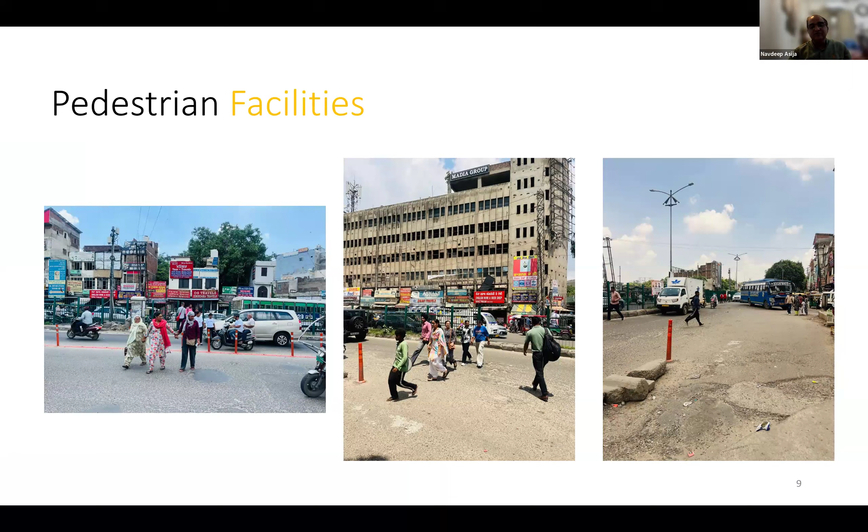This is Ludhiana. So just see the kind of pedestrian facility. This is just right outside the bus stand, and just imagine how the people are trying to cross the road. It's very challenging even to cross the road right in front of a bus stop, because a bus stop is where a lot of pedestrians come to board the bus and go wherever they want to go. And basic infrastructure is missing even to just cross the road right in the middle of the city.

This is National Highway. Again, with the picture from the National Highway, just see there is a pedestrian crossing somehow being marked, but right in front of that there is a crash barrier. So you reach the middle of the road and then you have to jump in order to cross the road. So this simply elaborates that pedestrian infrastructures are not being taken seriously.

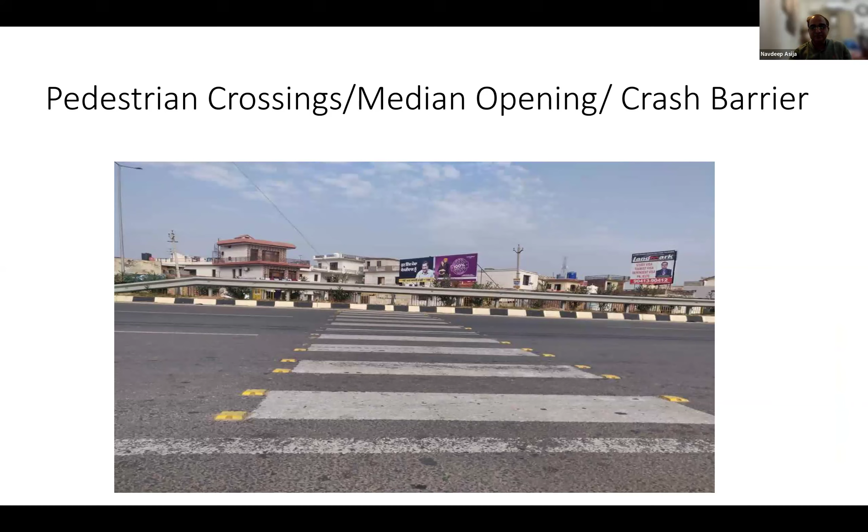Now, if you see the junction and the street, this is a picture from Pathankot. You see the kind of corner which is there. A vehicle can still take a turn. But if somebody is walking at night and there is no light, for sure that person will fall into that ditch.

This is another picture. We call it inclusive infrastructure, even for specially abled people and pedestrianization. You see that zebra crossing, on the other side there is a crash barrier, and on the back side, a sharp pole is there. Anyone can fall on it and get injured.

Similarly, on the right hand side of my picture, you see that tactile tiles are there. Maybe a blind person starts walking, and there is a pole in front, and then it is further leading to the wall. So first you hit the pole, and then you hit the wall. Such a misguided system, and the blind person following this is also a pedestrian. So this simply shows that the infrastructure seriously lacks accessibility for pedestrians.

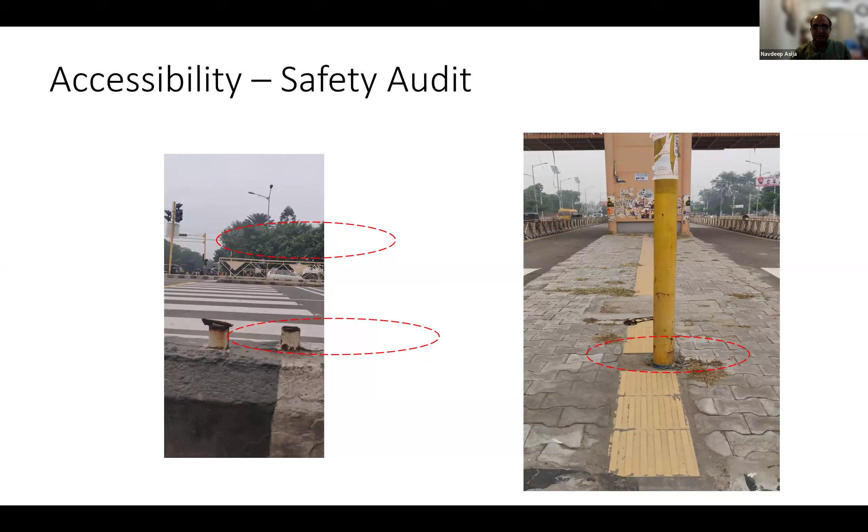Now, design wise, it's a good design in terms of, just see the picture. The open drain has been created right in front of their houses.

So either they'll die with the mosquitoes and the malaria, or otherwise somebody will... I mean, this picture, I'm the one who took the picture, but I actually helped him cross the road. I just took the picture and then I immediately rushed to this person and helped him cross the road. But later on, after the audit, the entire drain was covered. It was initially kept as an open drain.

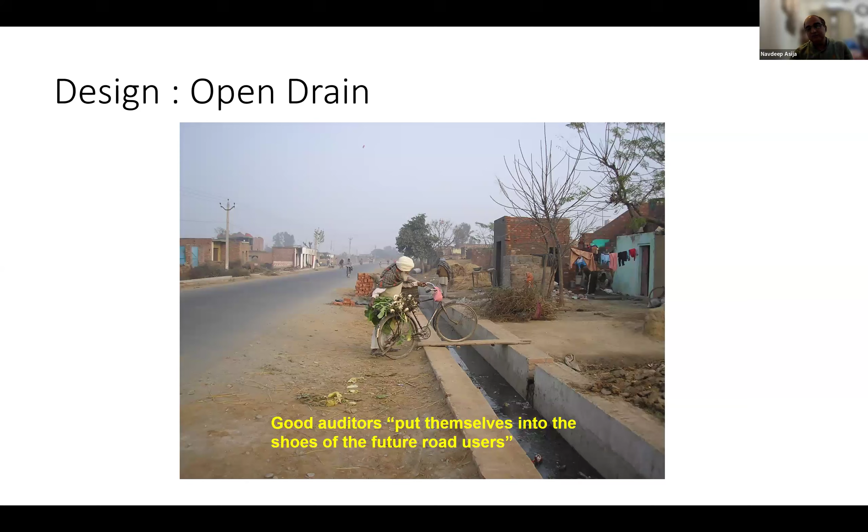So, as an auditor, sometimes we have to put ourselves into that situation so that you can see the problem of the road. We are not just a designer, but we need to put ourselves into that situation. Similarly, there are many such problems, and I'm just highlighting one after another. This is Lalru, another situation, and this is a common scenario: there is a flyover, the bus stops people at the toe of the flyover, and then they cross the road.

This is already known. This is Chandigarh, the most advanced city. The cycle track is there, the pedestrian path is there. So they have widened the road, and signages and everything are there. So there is a possibility that any vehicle may hit it. Or even, there is a zebra crossing, but in front of the zebra crossing, you see that they have put a bollard, a steel bollard or something.

Somebody on a wheelchair, and this is in front of the hospital. So somebody on a wheelchair, you can imagine how he or she will cross this road. So another challenge. Something has been done half-heartedly. Change has started happening, but the saddest part is it's very slow. This I showed you.

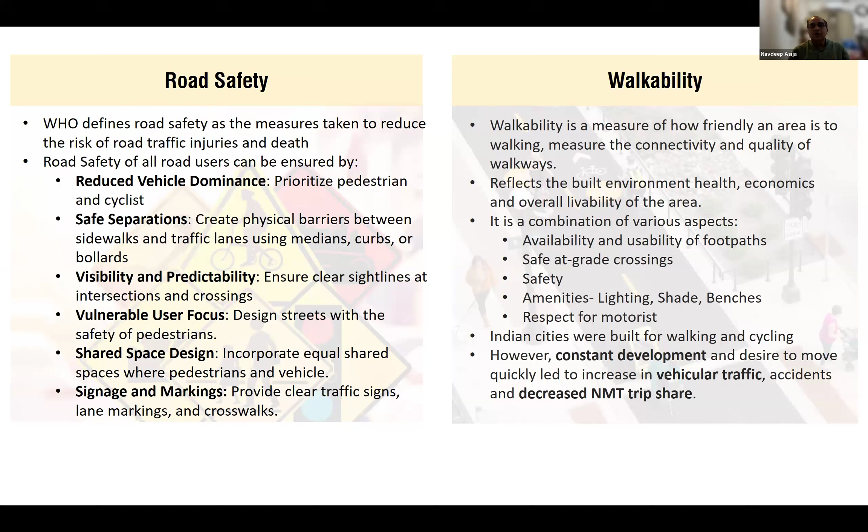I mean, one can walk, a child can walk, an elder can walk, and a kid on a tricycle can also move on that safe pedestrian walkway. And that is where, apart from ensuring their safety, we need to improve their efficiency as well.

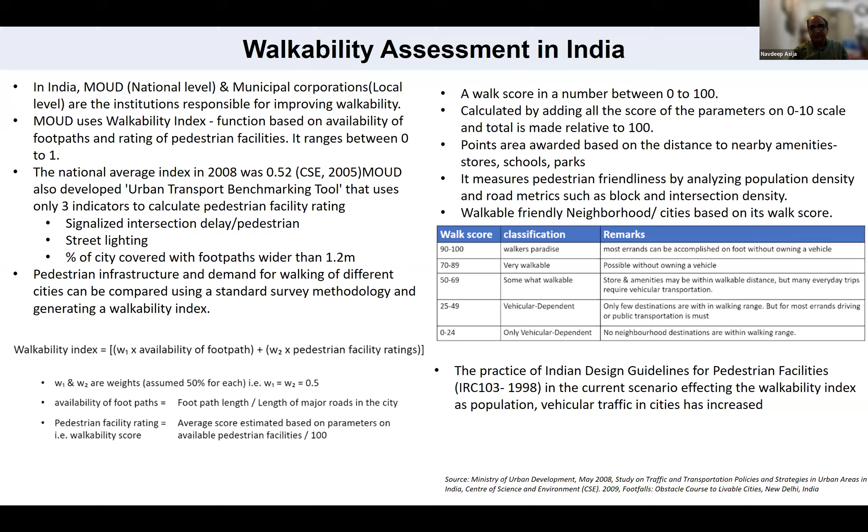So there was one study at a municipal corporation level conducted by the Ministry of Urban Development, which was a walkability assessment in India. So they came up with the walking score, 90 to 100. This is the kind of methodology they picked up: what percentage of the city is covered with footpaths wider than a threshold. So they picked up, in any city, the number of roads versus the roads which have footpaths more than 1.2 meters, because that's the minimum required to call something a footpath. So looking into these standards, they have done the rating score for the assessment methodology.

So this was a very important study. In the year 2008, they used this kind of walkability assessment parameter in terms of walking path modal conflict. They have done a very extensive study, with length of the surveys, walking time, all these, in order to do the walkability assessment and come up with a study. And this is the walkability score of India. So if you need any slide, I can slow it down on that.

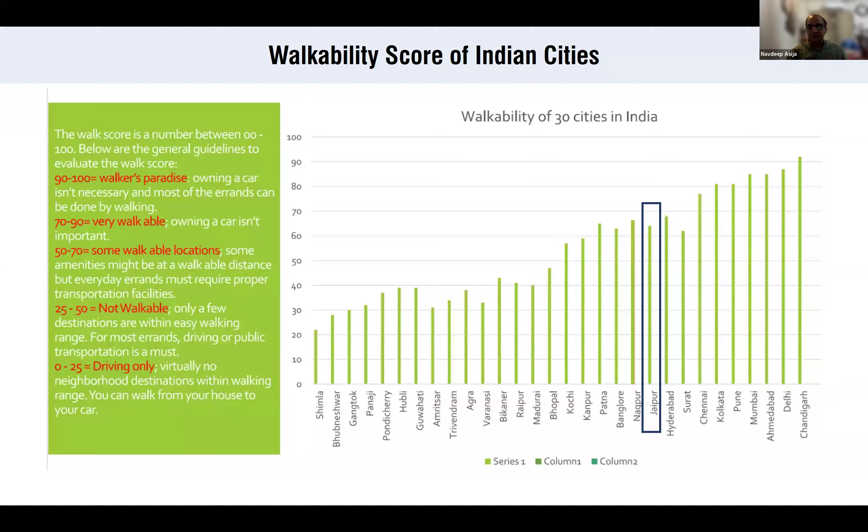All the tourist cities are supposed to be walking friendly, but you can very well imagine that things are not up to the mark. In Gangtok, a lot of effort has been made after this study to improve walkability, but this is the true sense. We have the numbers of deaths in these cities, but otherwise when we correlate it with the infrastructure, these are the general numbers available to us. Now this slide is I think the old one. I picked it up prior to corona.

So what has happened? The kind of infrastructure we have created actually attracted more motor transport. It expanded our cities. Our cities started expanding. Walkability has gone down. Cyclists have gone down. So now who actually gets the benefit? Imagine this. Out of the Fortune 500 companies, of the top 10, seven are oil companies and two are car manufacturers. So out of 10, nine are either selling oil or selling cars.

More pedestrians and cyclists are getting killed. No one is even thinking about them, but as a result, someone else is making profit out of it. So this is the kind of thing which has been created over time: we are creating infrastructure for motorized transport only, and we are actually eliminating our pedestrians and cyclists by design.

So there are international studies also available on walkability. I mean, there are a few glimpses. I'm sure Tara ma'am will also show her part, because the detailed study is not available in the public domain as yet. So this is a common slide, and why it is important is car-centric development.

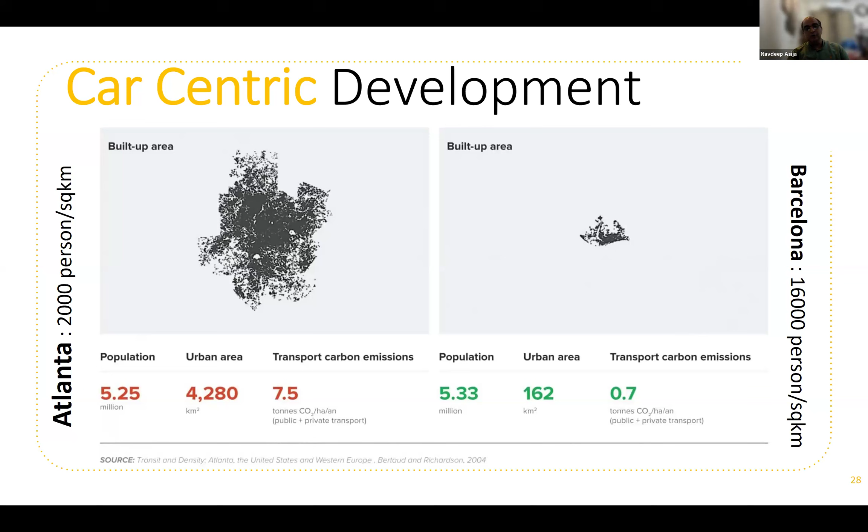But we picked up the left hand side urban design model rather than the right hand side urban design model. And that is where we all need to work, in order to sensitize our authorities about what is happening. Another social impact study, done by the University of the West of England, found that the people who are living along wider roads are actually facing a deteriorated local social life.

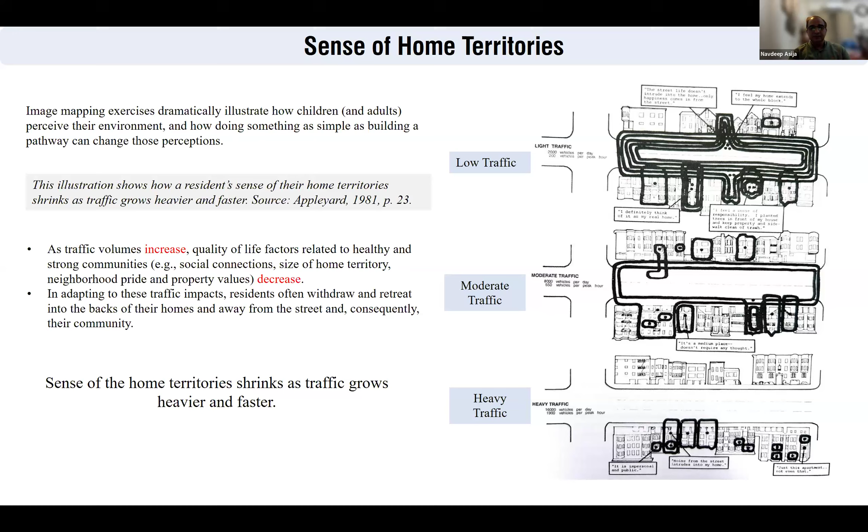So this was another study, I mean, an extension of that: the perception of a neighborhood. A 10-year-old child, when he was asked to draw a map, just drew something. The school is here, hospital is here. I mean, it's very disconnected. He just knows that something is there, but how to go there? He just made this sketch as a very disconnected path.

If you see this picture on the left hand side, this neighborhood concept was created by a 10-year-old child when he was asked to draw a sketch. And the same 10-year-old who was into bicycling and walking everywhere, when he was told to draw the map of the city where he is living, all the roads and every connection is very clear. He knows this road goes from left to right and right to left.

What is the size of the city, where the important places are, where my university is, where my school is. Everything is very clearly drawn. Why this disconnected path versus well connected path? The difference was the traffic. Because when the child was moving in the car, he was just able to see the key points, the key establishments, whereas on the right hand side, he was very clear. So that's why we lost our sense of neighborhood.

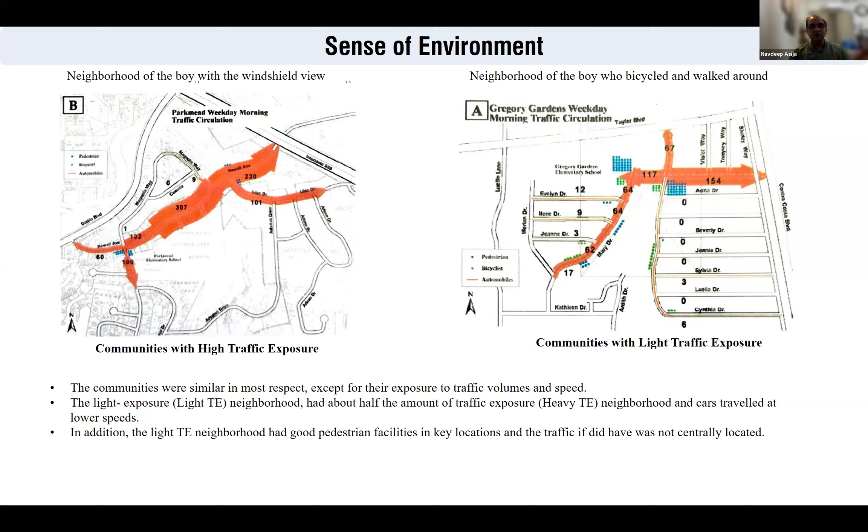the windshield view vis-a-vis somebody who's walking and cycling. The conclusions of this study were expression of danger and identification of a new pathway and stop sign. They were not able to identify many of the signages. Even the expression of danger: when they were asked to draw where they feel most in danger, they marked, I feel danger when I go to school. And after improvement, they have started improving things.

So such interventions or international studies are available, which need to be pushed into our own system. We need a lot of researchers and champions who can do the advocacy for cycling and walking. We are not against motorized traffic. They are supposed to be there. They need to be there. But at the same time, the most neglected part has to be there, because that is straight away impacting our individual life as well.

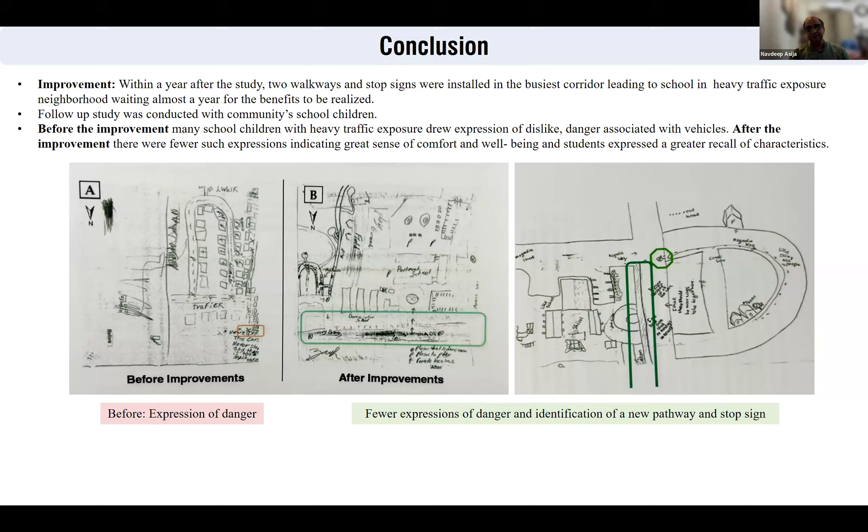So it's very simple. If you design a system or infrastructure for vehicles, the vehicles will come. If you design a system for pedestrians and cyclists, they will come. So saying that there are fewer people walking and that's why we don't need footpaths is not true. It is a bad perception being built into our system, into our decision making. As a matter of fact, wherever there is a safe place for walking, people love to walk.

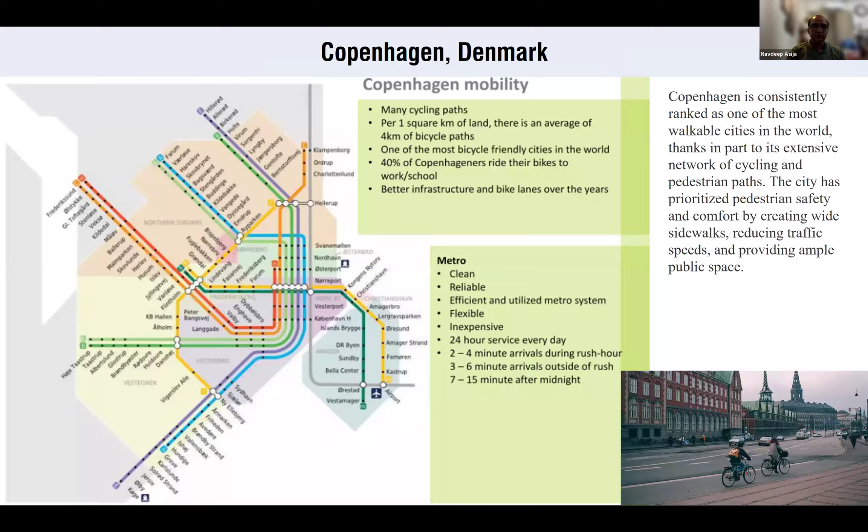So it's not that India is bad. I mean, it's not that India is not doing it. We are per se walkable cities. The majority of the cities still have that walking facility. It's just that first we are destroying that, and then later we are recreating it, or later we may recreate it.

So when it comes to Punjab, we have not stopped here just by building infrastructure, because that is something political: if one government goes and the next government comes, they may or may not take it forward. Taking one step further, we decided to extend this to the citizens as their right.

And when I say it is a right, we have fundamental rights, and Article 21 is the right to life. That guarantees us, and it is universal. It is not only for Indian citizens, but anyone who is even visiting India also has a right to life.

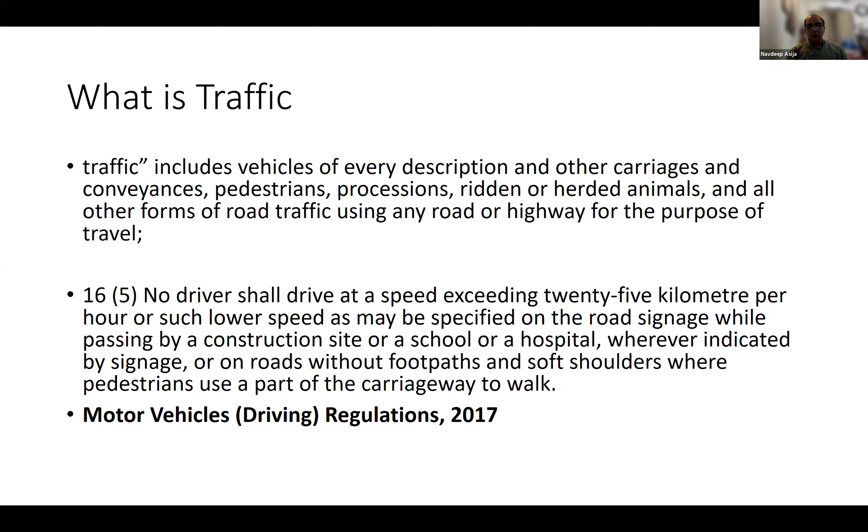So traffic, I have already given you the definition. So traffic and the right to walk are now together. So Article 21, I would just like to give you a brief, because we may not be from a legal background, and it's very important to understand that every infrastructure needs legal backing also, that when we make roads or anything, it is duly protected, supported and strengthened by the law, and that's why things are happening.

So now the right to life is Article 21 of our constitution. Justice P.N. Bhagwati in the 80s, when he was the Chief Justice of the Supreme Court, in one landmark judgment defined life as not only physical existence, but the use of every limb or faculty through which life is enjoyed. The right to life includes the right to a healthy environment.

So what he did was he extended the right to life to a right to healthy life. So only one word was added.

So now coming to our own part, which is the design guideline. I've given you enough of the problem. There are certain good things happening in the country, and now it comes to the guidelines. What do we have in our country to design safe pedestrian infrastructure?

So IRC 103:2012 guideline for the pedestrian facility is available, and at the same time, the general NMT guideline document by the ministry; both are available on the net. You can Google, and you can use this as your reference document for this particular lecture as well, because a lot of detail will be there in these two documents.

IRC, I think, is subscription based, but some PDFs are available on the net as well. And the NMT guideline document as a policy is available on the Ministry of Urban Development. These are two very important initial documents of our country. So now the guidelines are about non-motorized transport. I'm switching from just pedestrian and just cyclist to the overall non-motorized transport.

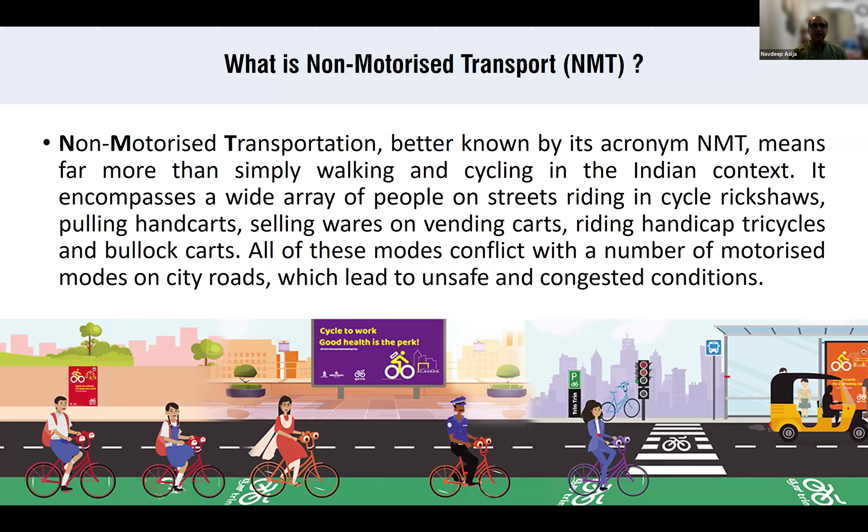It is very well defined in our IRC what actually non-motorized transport is. Largely, pulling carts, selling wares, vending carts, riding handicap tricycles, bullock carts, and it is defined in the traffic as well, and particularly non-motorized traffic has also been defined in IRC. So what is the character of the NMT? Because the next part is we will be talking about non-motorized transport.

Largely it is pedestrians and cyclists, and others also, which is street vendors, people on a tricycle, and everybody has to be taken. It's not just about a cyclist. We have to take a larger picture. So the NMT definition is there. This is given in the IRC. And the pedestrian is any person on foot; guidelines are there.

And a cyclist is any person using a physical power driven cycle. People who use a bicycle, three-wheeled cycle, rickshaw, four-wheeler carts are all included as cyclists. It's not just the bicycle only, but three-wheeled rickshaws or four-wheeled carts are included as cyclists, but driven by physical power, not by motor power. So that's the change. Four-wheel means he's talking about the carts. It's written cars, I think that's carts.

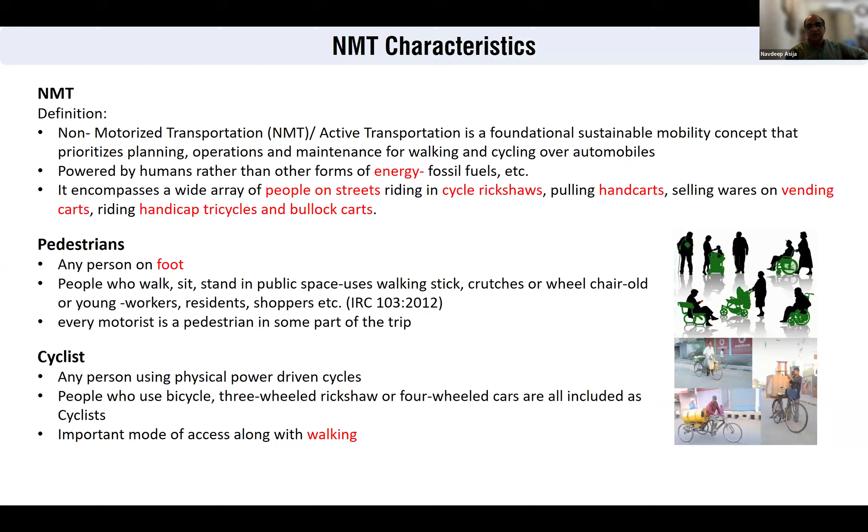Complete streets means streets with everything from street furniture to a place where I can sit, a place where I can walk. I need a good washroom facility and many other public utilities. Everything should be available while walking. The way we have created similar things for motorized transport, wayside amenities and all, similar kinds of things we need on a footpath.

And the most important is an interconnected NMT network. It's not that you will build 5 kilometers of road and expect that people will start walking. The way all our roads are interconnected, from A to B, we can move anywhere. On similar lines, we need it interconnected. So from point A to B, if I have to walk or feel like cycling, it's not that after 5 kilometers there will be 2 kilometers missing and then another 3 kilometers. Whatever we do, whatever we plan, it has to be in continuation.

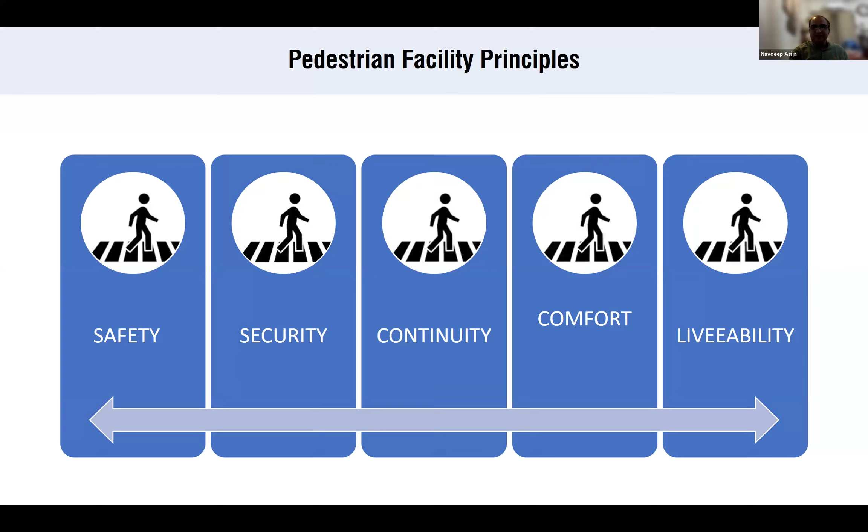As in one of the judgments by the high court I told you about, they are not only talking about walking as a pleasurable experience, but even about the minute details of material selection, that when I'm walking on the footpath it should be nice and good, no broken footpath, no broken tiles, good drainage facility, everything. So livability: when livability comes, lots of vendor hawking space, nice shade, kids and children walking. That makes every space livable. So that's the pedestrian facility principle.

Why I'm quoting time and again Lovely Professional University is because it's a beautifully designed campus. And the best part is, many cities have a 50 to 60,000 population; at least 4, 5, 6,000 cities of this population size are there in India. And the kind of chaos over there, every day there is a jam, there is honking, noise pollution, road accidents. The same 50,000 people are staying in that 500-acre campus: zero fatality, no noise pollution, everybody's walking.

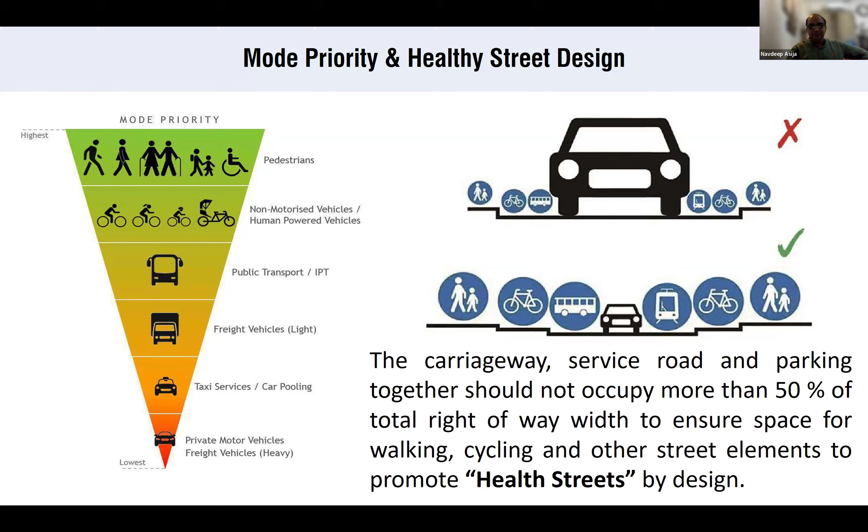Coming to the pedestrian infrastructure design, every design now has a particular design. As I told you, design should cover everything. I agree with Professor Nagendra that LPU actually has a lovely campus. Pedestrian infrastructure wise, what is needed for pedestrian level of safety and level of service: we need a footpath, a curbstone, tactile pavers, guiding tiles, warning tiles, bus stops. Many of you, as an architect, planner, or civil engineer, must be doing this as an individual exercise, and many of you must be exceptionally good in all of it.

But when we come to pedestrian infrastructure, we have to do it in totality. Street furniture, bollards, pedestrian guardrails, signages, street lights, landscaping and street vending, pedestrian crossings, very, very important, at-grade pedestrian crossings and grade-separated pedestrian crossings, which rarely work. And when it comes to the footpath, width is very important, height is very important, the kind of texture and surface, then continuity and integration. Like bus stops are supposed to be integrated with the footpath so that if I walk, I can straight away stop at a bus stop rather than having to go onto the road and then stop at the bus stop. We need everything in continuity.

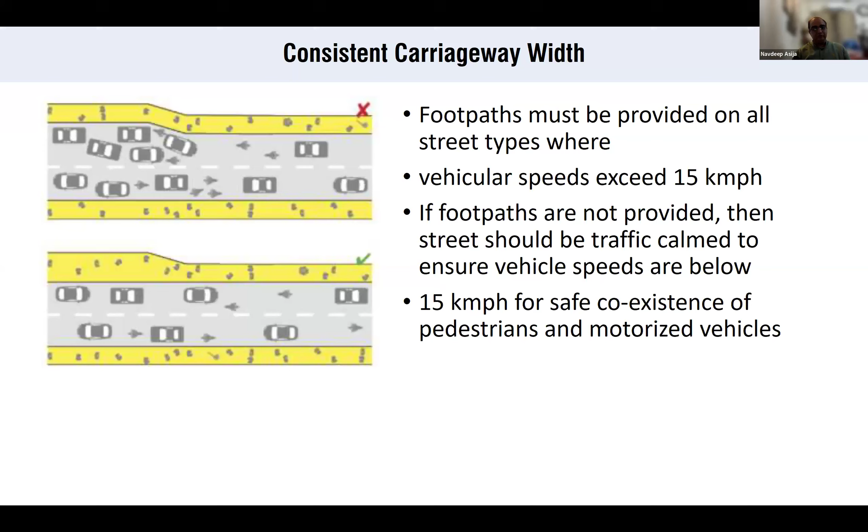Pedestrian flow wise, we generally take 1.5 times. If you are planning anything for one direction, it is fine. But if something has to be for both directions, we need to increase the width by 1.5 times. So these are the standards given in the IRC. When you are auditing a footpath, we can actually check the volume and check the pedestrian level of service, whether it is level of service B or C. We can do this for a comparative study also.

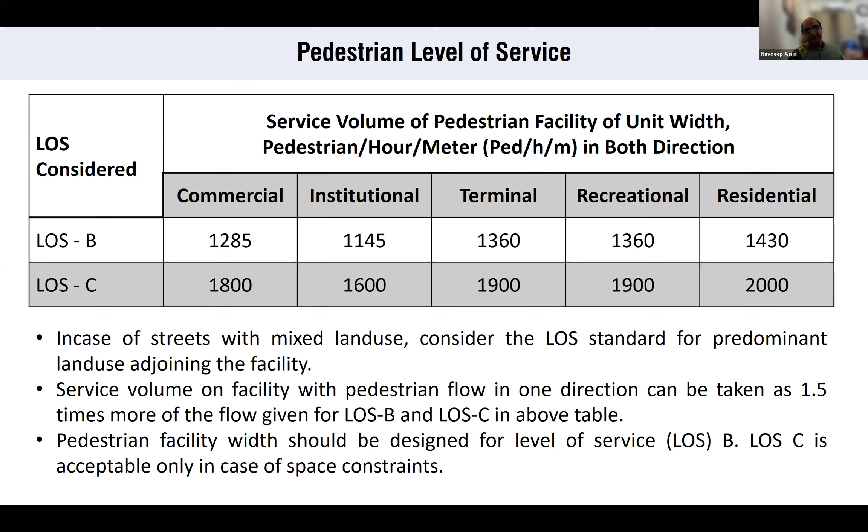Like for example, we are picking up one road for a design and we check today that there is no footpath. If it is 1 meter, fewer pedestrians are there. We can actually calculate the level of service, say E or F or something. But when we improve it, we make a nice footpath and everything, we'll find that the level of service has gone up to B. So that is even a directive we can give to our designer and engineer as a client, that the intent is actually to improve the level of service from C to B, or anything, by assessing the existing system.

So even if I make the same 2 meter wide footpath next to the wall, I will be effectively using that footpath as a 1.5 meter width instead of 2 meter, because half a meter may go wasted because I'll not be able to walk just next to the wall. So this is the kind of mathematics we can do for any city where we live, any exercise we can take up.

As I mentioned, the very first principle is to assess. So for advocacy also, we can actually tell the authorities that, boss, you have made a footpath 2 meter wide, but since it is next to the railing, next to the wall, the effective width is actually 1 meter, and fewer people are able to use it. Why don't we make a buffer, multi-utility zone, and everything so that more and more people can use it?

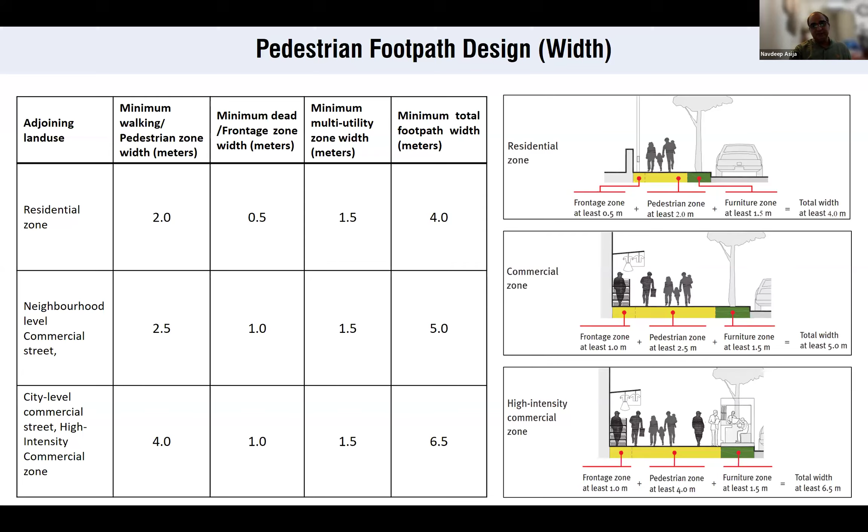So the kerb stone design is very important, because we are not supposed to jump onto the footpath. We simply step up. For example, when we design our home, we are very clear in designing the height of the staircase, what the height should be, because we have to walk. But when we design the footpath, we simply miss that. So the IRC says it should not exceed 150 mm by any chance. That is where children, elders, and adults can actually step onto the footpath, and vehicles will not. Making a height like half a meter makes no sense. That entire footpath will be of no use.

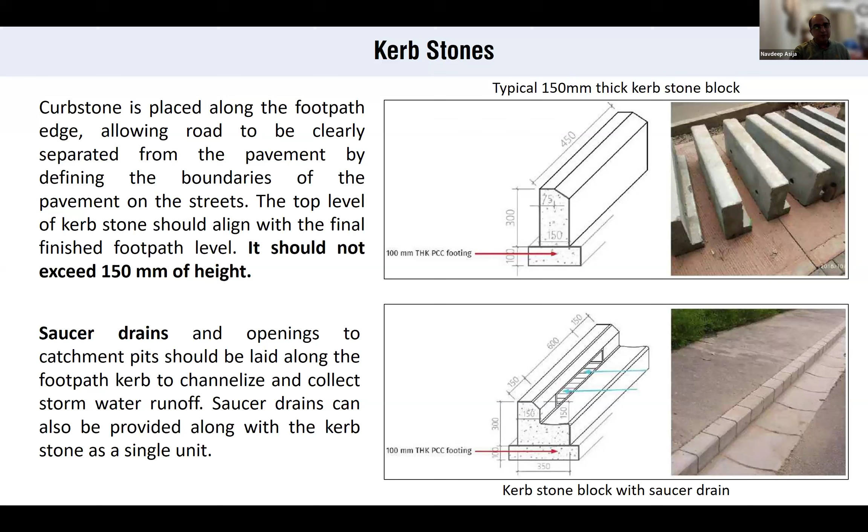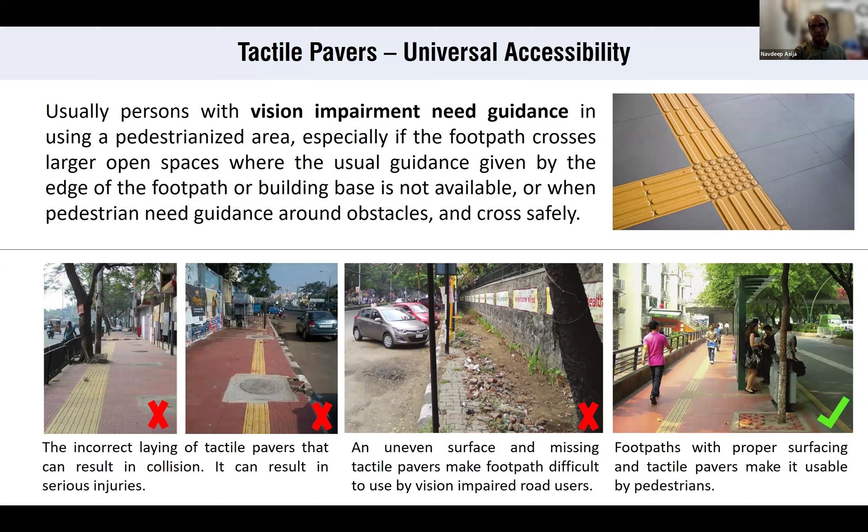So tactile pavers, universal accessibility, we all know how we are supposed to do it. The correct way and incorrect way are very much there. You can see they have made a footpath even next to the wall, and you can very well see that nobody is able to walk. At the same time, where the proper footpath is made, in the picture on the extreme right, people are actually using the multi-utility zone also. The wall height is less. Tactile, universal accessibility pavers are also there, and you can see in totality that this is how it is supposed to be.

These are the two types of tactile pavers: warning tactile and guiding tactile, just to give a direction, and the one we place where we have to change the direction.

Street light, another very important one. From the various components of the design, street light is equally important for the footpath if you want more and more people. And obviously, when we conclude our day's work, evening time is when we start walking, and that is the time when all the footpaths are in dark. We are supposed to have a better, well-lit design for our footpath, our pedestrian zone, our NMT zones.

So the standard thumb rule which has been given for the street light design for footpath and cycle track in IRC is about 20 to 30 lux level for footpath. And as per IRC road safety principles, this lux level is supposed to be double when we are making it for the crossing of the road. This is for the footpath when we are moving along the road, but when we are crossing the road, the lux level is supposed to be double.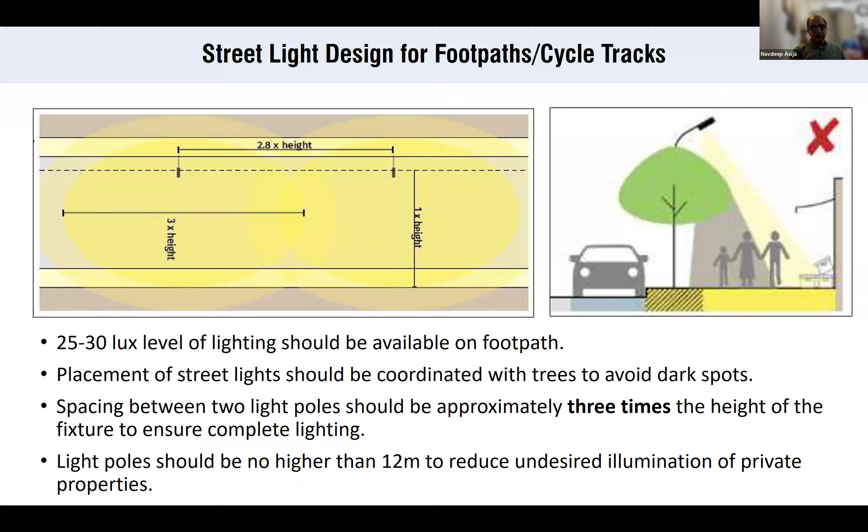So this is like 2.8 into the height of the pole. So the spacing and everything can be designed. The spacing between two light poles should be approximately 3 times the height of the fixture. And the light poles for pedestrians are low height. The picture on the right hand side is showing you that you don't need a very high rise, you just need a pole with a small height.

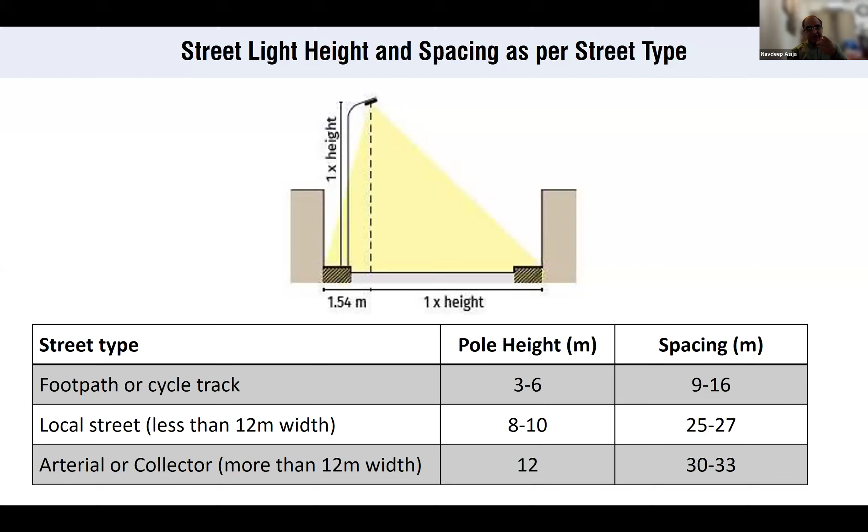So this formula has been given in the IRC: street light height and spacing as per street type. For footpath and cycle track, pole height is 3 to 6 meter. For local streets with less than 12 meter width, the pole height is supposed to be 8 to 10 meter. Arterial roads more than 12 meter width are supposed to have a pole height of 12 meter. The spacing standards are also given, height versus spacing. So this formulation is there in the IRC.

Bollards and signages on footpath, these are the standard signages. I'm sure many of you must be practicing and are very well aware of it. But the general IRC says the bollard should be 0.5 to 0.7 meter high with a 1 meter clear distance so that somebody on a wheelchair can also cross. It should not be that closely spaced, which I showed you in my very first slide of Chandigarh, where in front of a zebra crossing there were bollards, and even somebody who's walking can't cross that. So for that this is needed.

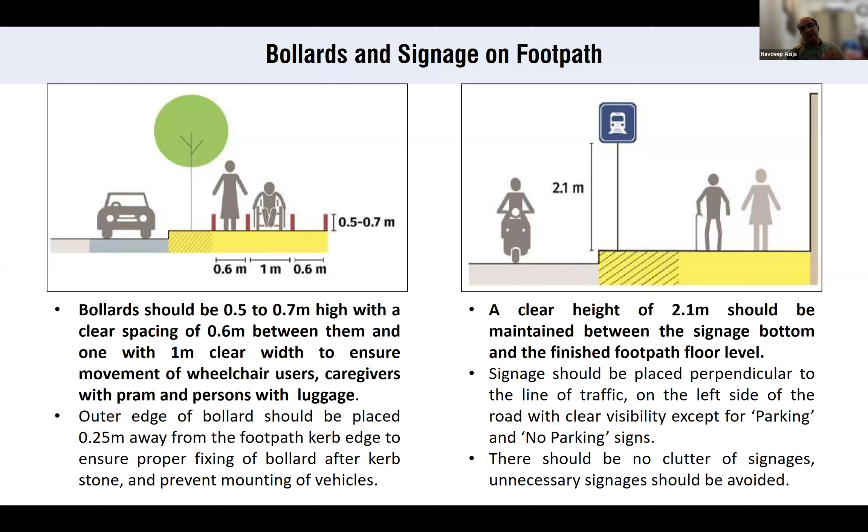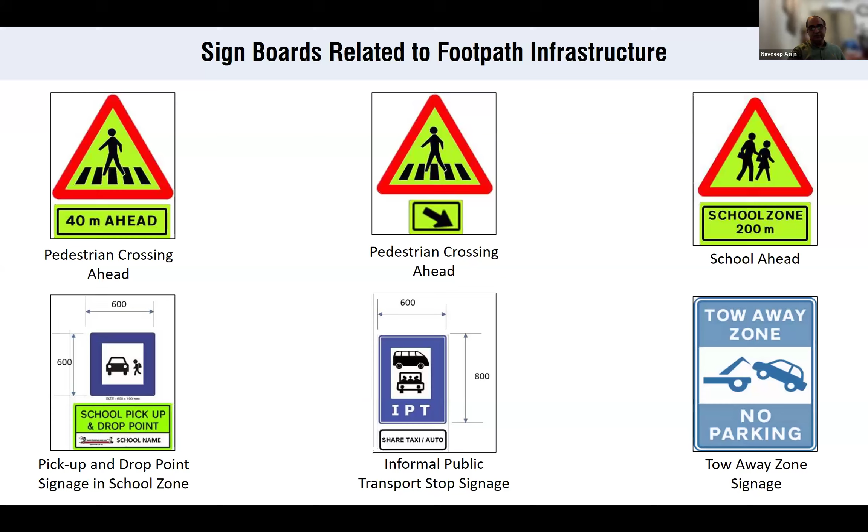And when we are putting signages, they should be in the multi-utility zone, and the height is 2.1 meter. Why 2.1 meter? Because if somebody is walking, the signage should not hit his or her head. One should be able to walk freely under the signages. These are the signboards which are newly introduced in the IRC pedestrian crossing. They are in fluorescent color now, and these are the things we need to put into our footpath infrastructure.

So this defines what is crowded: the more pedestrians there are per square meter of an area, the lower your level of service for pedestrians. So pedestrian level of service, as I showed you, C and D, right? So this is the further elaboration of that.

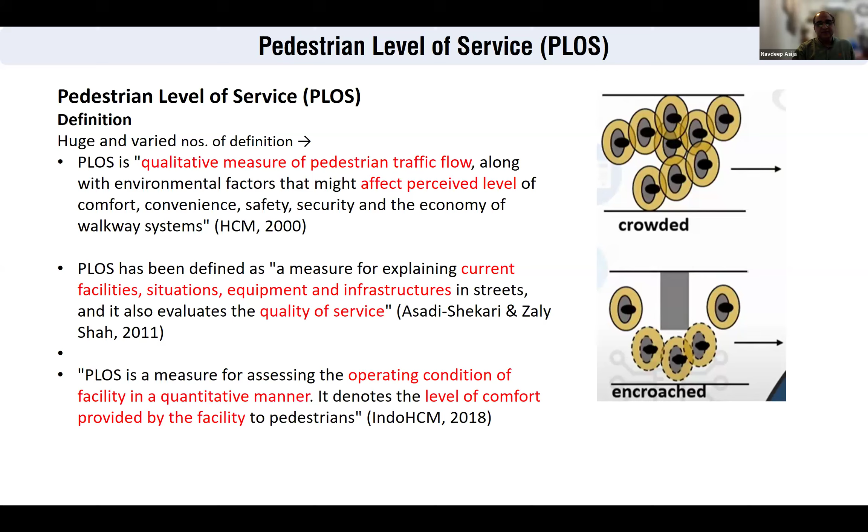Indo HCM. These are the standards; the HCM is the Highway Capacity Manual, and the Indo HCM is developed for India with the CRRI. It's a good document. We all need to read about it. One can purchase it. It's not freely available as of now. So this is the level of comfort. So this is the level of service.

As per Indo HCM, pedestrian level of service for footpath is this. They have given a shy distance also. The shy distance, as I told you, is the distance when if there is a wall or any obstruction on the left and right side of my walking, I'll start walking a little away from it, and that distance is known as a shy distance.

So IRC has very clearly defined under Indo HCM the fixed width: if there is a fixed object, physical width, any functionality, unusable space and the buffer given to the object by the pedestrian. So that we call shyness. So if there are benches, our shy distance is generally 0.3 to 0.5 meter; we just don't touch the bench, but we move slightly away from the bench.

If there is a wall, that shy distance is 0.4 to 0.6, meaning half a meter almost. If a guardrail is there, then we try to walk away. So if you make a nice footpath and put a guardrail there, and on the left hand side there's a wall, and you say my footpath width is 2 meter, as a matter of fact, if I do this calculation, actually my footpath width is 1 meter, because 0.5 for wall and guardrail has actually gone. If a traffic sign is there, we'll slightly move away from it. So these are the shy distances we are required to know when we do the calculation.

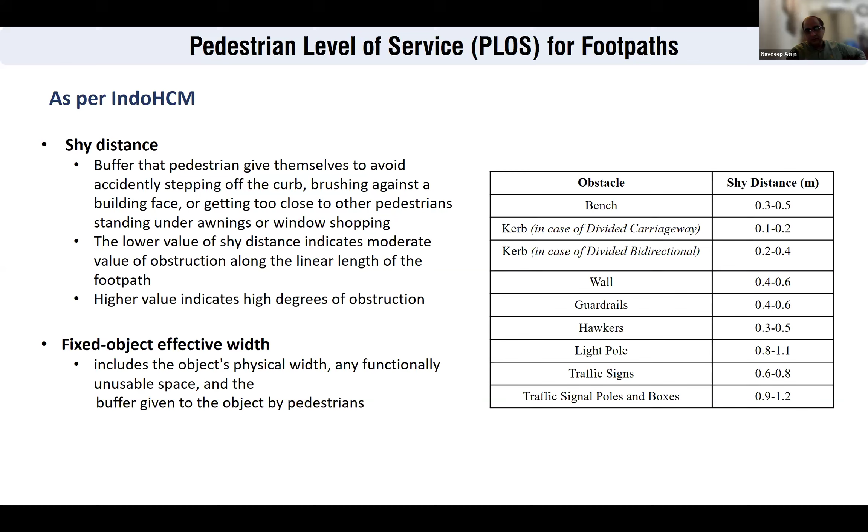These levels of service are actually given in the Indo HCM code as well as in the IRC. So let me quickly show you the numerical problem, and later on you can solve it. Suppose there is a 2 meter wide ideal footpath with no obstruction in a transport terminal, with a wall on one side, while the other side is barricaded by guardrail. The existing peak flow is 1800 pedestrians per 15 minutes. We need to tell the present level of service of that footpath, and the widening requirement to maintain level of service C. Use the pedestrian LOS standard as defined by the Indo HCM 2016.

So they tell us my footpath is 2 meter wide, right? And 1800 pedestrians are crossing in 15 minutes, so I can calculate the 1 minute rate. Very important, they have told me the wall is on one side and the barricade is on the other side. So precisely my effective footpath width is 1 meter, not 2 meters. So I will define this as pedestrians per meter. I will calculate how many of the 1800 pedestrians per 15 minutes actually cross in 1 minute, because here my levels are pedestrians per minute per meter, right? So it will be like... oh, sorry. So next.

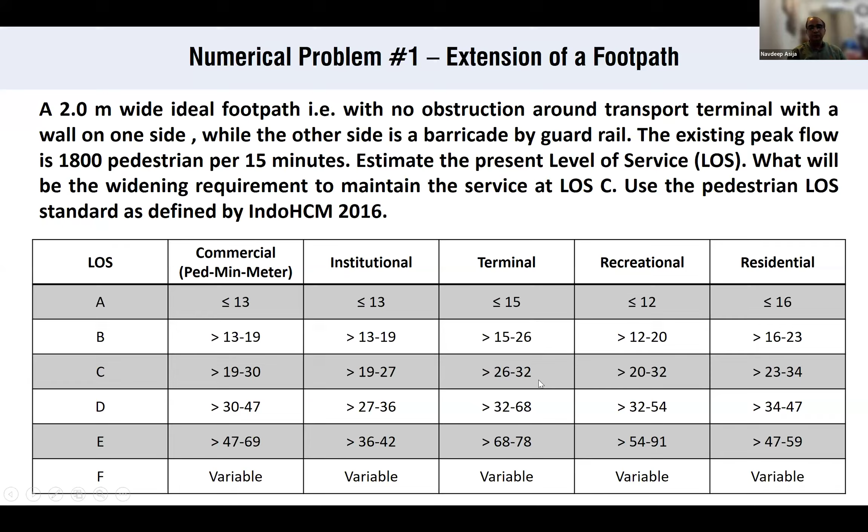Now, what my numerical is, they say I want to improve it to the level of service C. So if I have to make it a level of service C, I need my flow rate to be between 26 to 32. So to manage that peak flow rate, I have to divide 120 by 30. So I'll get 4 meters of effective width, modified width, considering the given shy distance, because they are saying the railing and wall is going to remain there. So precisely I need a 5 meter wide footpath and NMT zone area.

If I want to improve my level of service from F to C, if I want to improve the quality of my footpath from F to C. So that was the challenge, and this is how we can do the simple numerical mathematically. Simply don't just go by the drawings. Drawing has a basis. So whenever we are deciding the width of a footpath, where that footpath is going to be. For example, for 1 kilometer of road, you are designing the footpath.

In the first 500 meters, there is a wall. So my width of the footpath is not going to be a constant 2 meters. For the initial phase, I may need a 2.5 meter wide footpath, and where there is no wall, a 2 meter wide footpath will also solve the same problem. So I hope it is clear. I just added one numerical problem just to demonstrate to you.

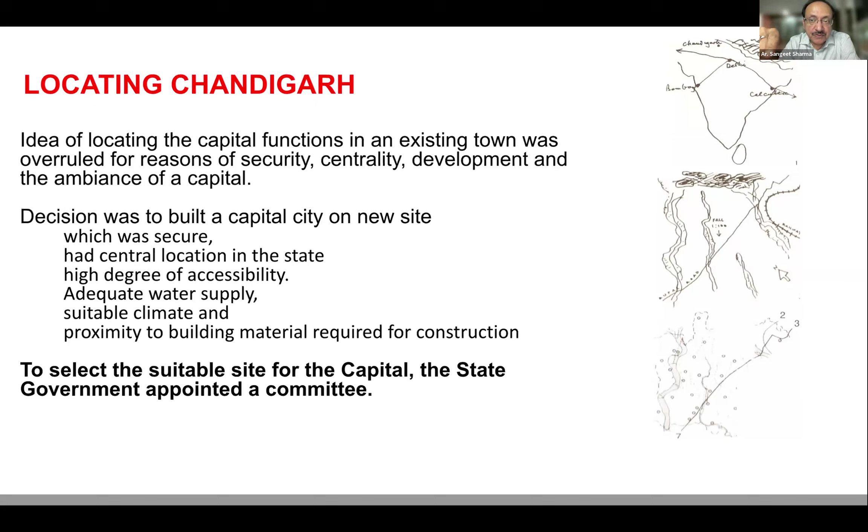So we have a lot of original drawings and survey maps, which now we have passed on to the CEPT archives, to keep and retain all my father's materials and drawings, sketches, everything for the world to see, for the whole world to use and refer. So selection of the site was more important, and I just told you why it was done like this.

260 kilometers north of Delhi, we needed water. So on the sides of this master plan, you can see two rivulets. They're like arms. The water was done. We needed breeze and air, and we wanted view. So it was proximity to the hills. We had a gentle gradient for natural drainage, which was available, and of course free from physical encumbrances, with mango groves and temples marking the site. Where would we find this beautiful place? 50% of the job of getting a wonderful city of Chandigarh was because of its location.

Anywhere you go wrong, or anywhere a little up and down, it would be horrible. We have seen the rains in the last few days. We have seen the incessant flooding. Of course, the water stopped on the roundabouts a little, but then nothing else happened. And we know what happened to the roads of Punjab. In Chandigarh, all is fine. So the proof and the test of time is there for 70 years to be seen.

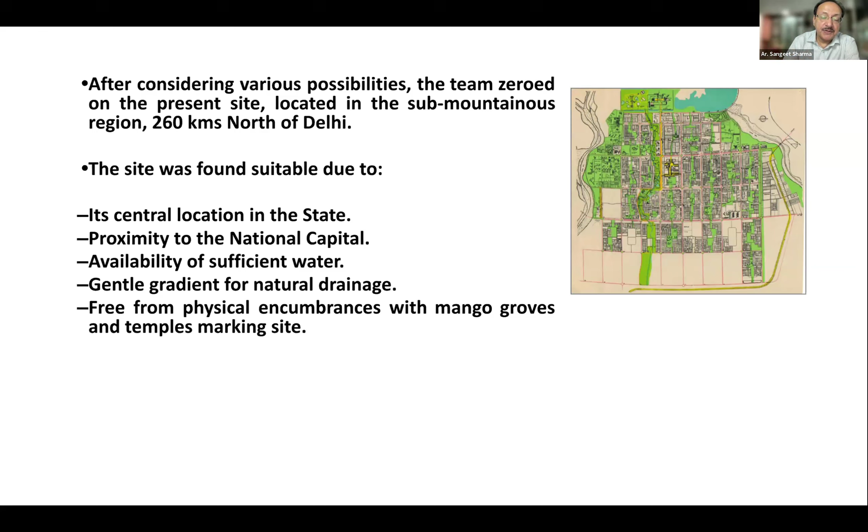As the story goes, we had agricultural land. The people here, the farmers, were compensated, they were vacated amicably, of course, and we placed all the sites. It was designed by Matthew Nowicki first, and all the villages were of course treated well, and the mango groves were kept in one place. And how beautifully the mango groves were used, I'll tell you.

Just now we heard a lecture by Sir prior to mine, how beautifully he said that the human scale is so important. Everything revolves around the human being. Whatever we may do, we are bringing man closer to nature, and that I think is the biggest contribution of the architect. And you can see the saying below, that he cautioned the world by saying that sun, space, and verdure are the ancient influences which have fashioned our body and our spirit, isolated from the natural environment.

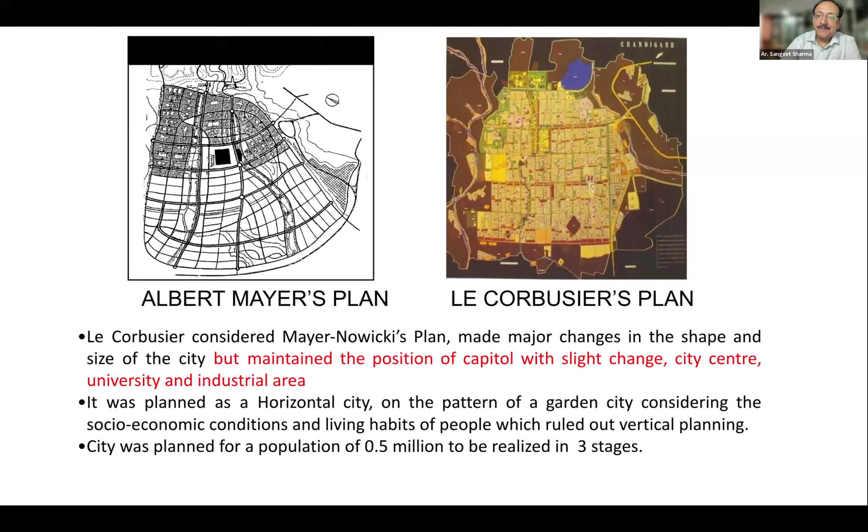Dividing the whole site in sectors was a good policy. It was important to give the person living there accessibility. It was important for people living in housing at that time. Mind you, India was not used to housing. We all are used to living in our independent houses with a lot of open courtyard and this and that.

So suddenly, Chandigarh introduced G+2 at the time, and we had no lifts at the time, and that also had to be implemented very carefully, drafted into the minds of users, that it's not something unhealthy. And therefore all the terrace gardens and terrace sleeping, for washing clothes.

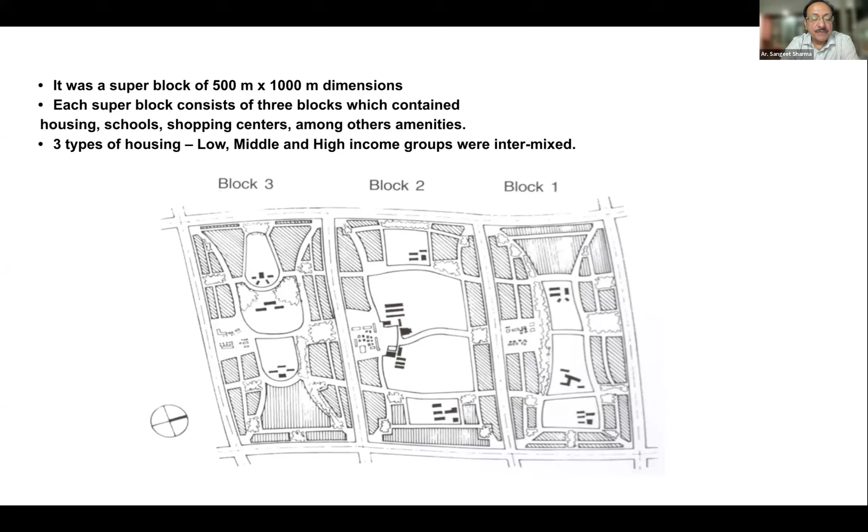So the housing in Chandigarh, we have, I think, 13 different types by Pierre Jeanneret, Maxwell Fry, Jane Drew. Unique, absolutely beautifully designed for a common man, and purely based on the usability, the functioning, particularly by the Punjabi community who would use it.

Going very quickly, all of us know about Chandigarh. All of us know about the master plan. I've told you the story behind it, the emotion behind it. Chandigarh, in fact, is not just a city, it's an emotion, simply because it was made out of chaos. So anything which is developed out of chaos needs to be more artistically, sensibly implemented.

We architects cater to rich people, people who have the money. So we have the virgin barren land, and we can do what we like. But when you're building something out of chaos, you need more sensibilities, and that is the success of Chandigarh.

Going forward, essentially the top is the bureaucratic capital complex, and the MLAs and other people live in the top sectors. In the center is the city center, sector 17, and the railway station is kept a little away. And Corbusier did not make this whole master plan. He only made half of it. He only designed the buildings for 1.5 lakh people.

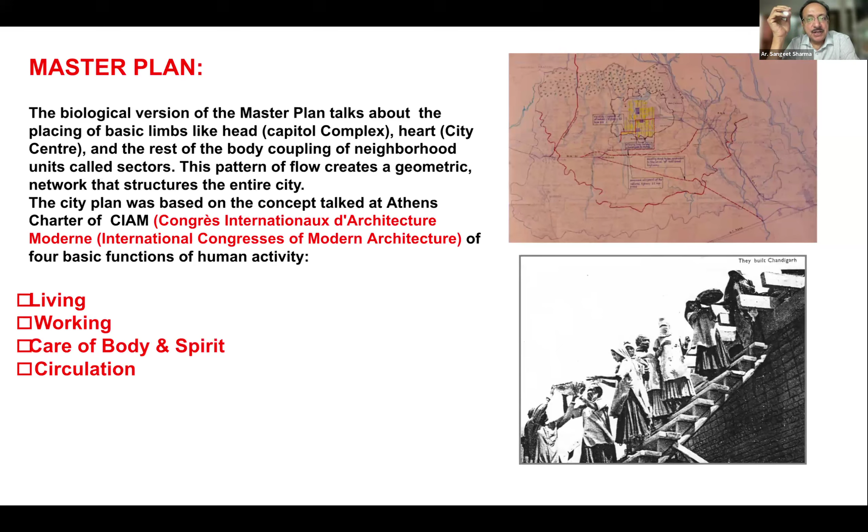So the moment you differentiate your master plan into living, working, care of body and spirit, and circulation. Living, working, care of body and spirit, I've touched a bit. We are here to talk about circulation, right? And all that which Corbusier worked on, writing about, professing about the clarity, purity of circulation, the vehicle movements, the parking, etc., was now to be implemented.

Very rare pictures. In the center is the foundation stone by Jawaharlal Nehru. Some black and white pictures of that era, and we have geniuses working in Chandigarh. Very strange, an Indian city developed by four foreigners.

A lot of people ask me when I go talking abroad, and I keep talking about Chandigarh. They say, were they acquainted with the weather conditions, the climatology, the nature of people, the culture of the area? I said, look at it, go see it, go feel it. They were more Indian than us.

I don't think a lot of people from the South who are on this panel would know that Pierre Jeanneret, his cousin, said that after I die, my ashes must be immersed in Sukhna Lake. Imagine that kind of devotion, passion they had with Indian cities.

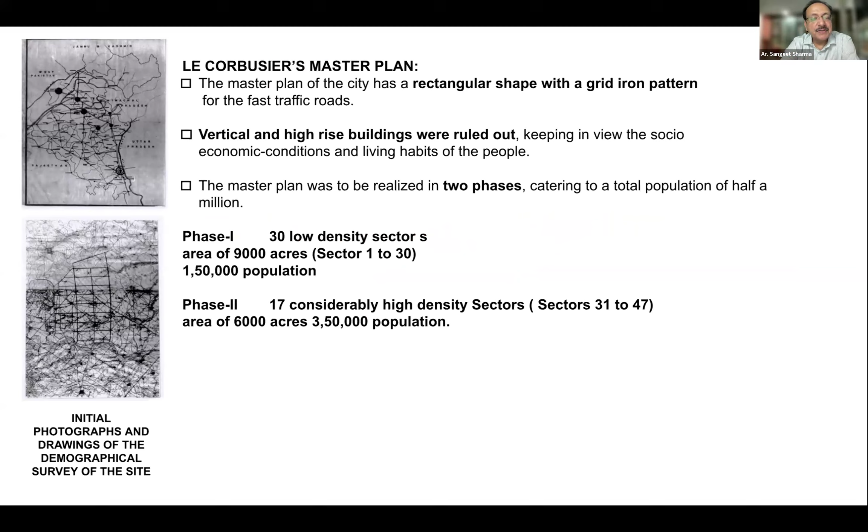Quickly, let's talk of densities. Phase one, just about 1.5 lakh population. So sectors were 1 to 30, and phase 2, it was 31 to 47. The pattern increased. Thankfully, we had sectors, and we could actually pull them up. You could just pull those sectors and expand it, and they go as phase 1.

You can see the slide and you understand how quickly the development of the city took place from sector 15 to sector 53, and phase 1, 2, 3, and the 10-mile green belt and the man-made lake, and how the zoning was important. The circulation is implemented.

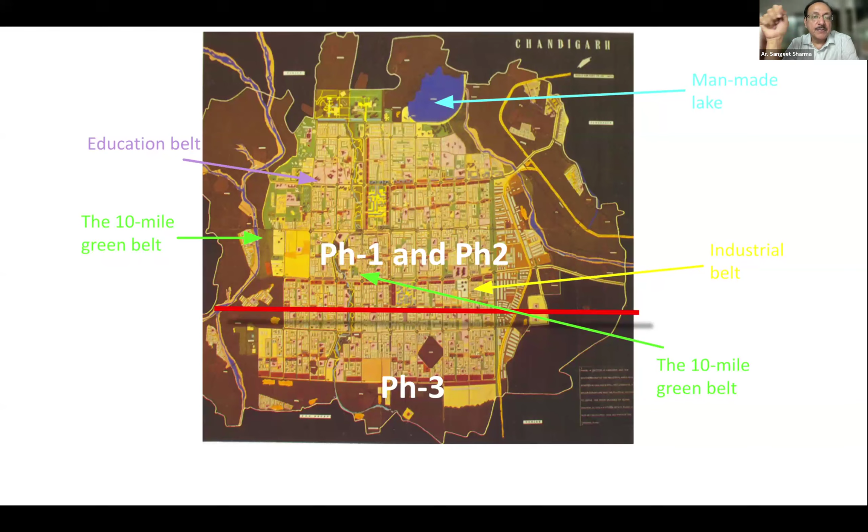Circulation is successful if your planning is correct. No amount of circulation, no amount of road patterns, no amount of talking in that language will help if your planning is incorrect. In Chandigarh, why am I talking about it? Because the planning was near perfect. The sectors were there. It was divided by roads, and therefore the circulation system became a little more confident.

Some of the principles while designing Chandigarh. And we all know that Chandigarh is of concrete and brick as the main material, and simple traffic systems. Simple, of course, but then there are systems. If you divide the words as simple traffic system, it is a system, and therefore it is simple. If there was no system, it would be chaos.

And the very fact that Chandigarh could grow so easily, it could keep on assimilating and adapting to the population, the immigration. The people wanted to have a piece of cake in this city. Everybody, so it took it in itself. It blended and lent itself to the various onslaughts of population. It's still doing.

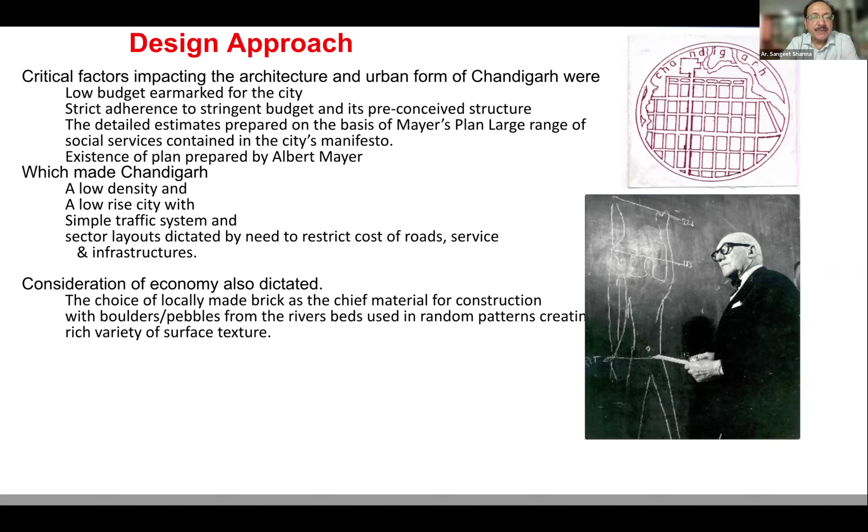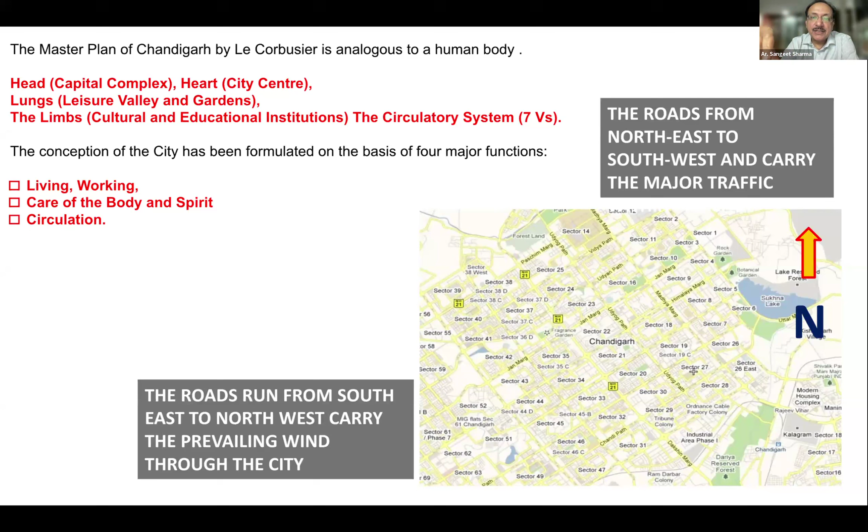The analogy which Le Corbusier did was that the capital complex was the head, the center was the heart, the lungs were the leisure valley, and the limbs were, of course, the cultural institutions. The circulating system was V7. V7 was not something unique for Chandigarh. Friends, Corbusier was doing this for many years, and he did this first experiment for UNESCO, which probably could not get implemented. So he had this tool in his hand, which very effectively he brought into Chandigarh.

At the time, when there was hardly any vehicle on the roads, I have pictures in my father's files where we have an 80 feet wide road with a bullock cart and one rickshaw, and captions that this man is eating away the Indian scarce money, etc., etc. But as I said, they are the visionaries. So he developed the system of V7.

Quickly speaking, the fastest road when you enter into the city is V1, and the arterial roads around the sector are V2. V3 is the fast vehicular sector dividing roads. Then V4, the shopping street. V5 is inside the sector. V6 is access to the houses, and V7 is the footpaths or cycle tracks.

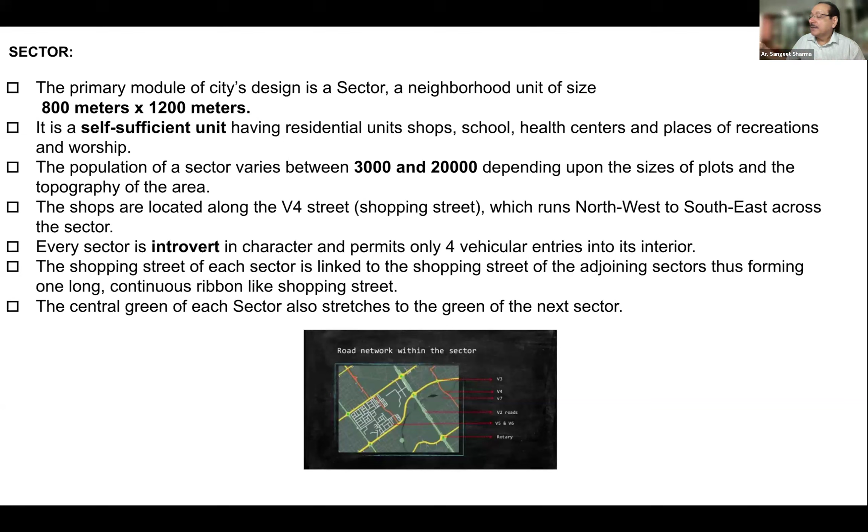So the sector is 800 meters by 1200 meters. It's a typical modular scale. And the sector is a city in itself, and population varies between 3,000 to 20,000 depending on the size of the plots. The density, of course, in the southern sectors is increasing, and we have a vision. We know how to go about it, and therefore, so far so good.

I said V1, friends, is the entry into the city, and V2 and V3 roads you can see on the right side of the picture, which is very easy, and we have a lot of pavements. We have plantations. So in Chandigarh, you don't see the width of a road per se. We know that there's a huge road, but then it is embellished with horticulture, with trees and all these plantations, which are very beautiful, and we have named these paths as Vidya Path and Chandi Path, etc., etc.

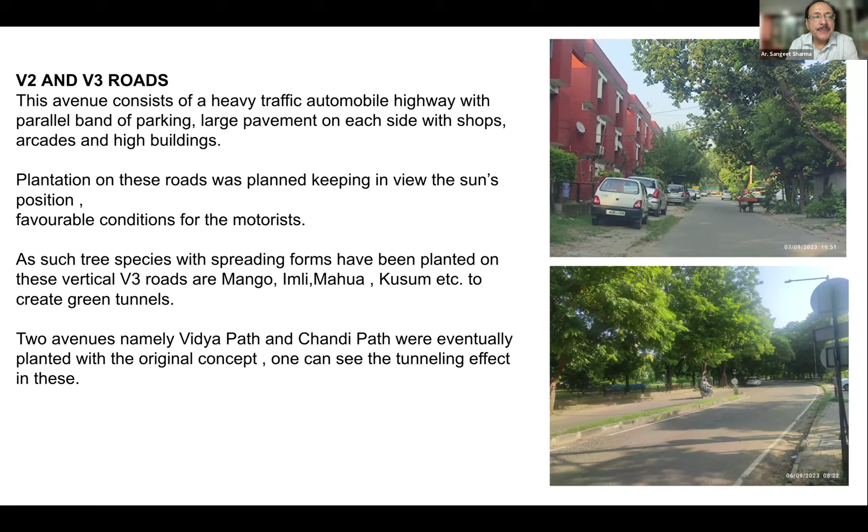V4, all the shopping streets, all the shopping which happens, as you see on the right hand side, is on the V4. Roads start from bigger width sections. I'll just come to that. I'm just giving a quick introduction. I'll make it slightly quicker.

It's 8:30. V5 roads are those that circulate through the entire sector. You know, as you move inside the sector, the road starts to narrow down because he felt that the speed of the vehicle governs the section of the road. Then the V6 and narrow lanes, and how each road is managed.

The height of the houses, we have a straight picture there, is kept straight. You don't see in Chandigarh up and down, up and down. That elevational line is fixed. We have louvres if we need to. Then we have the horticulture, the plantations on that road. We have pavements, beautifully designed things, and V7 is the pedestrian, and the cyclists are very active these days.

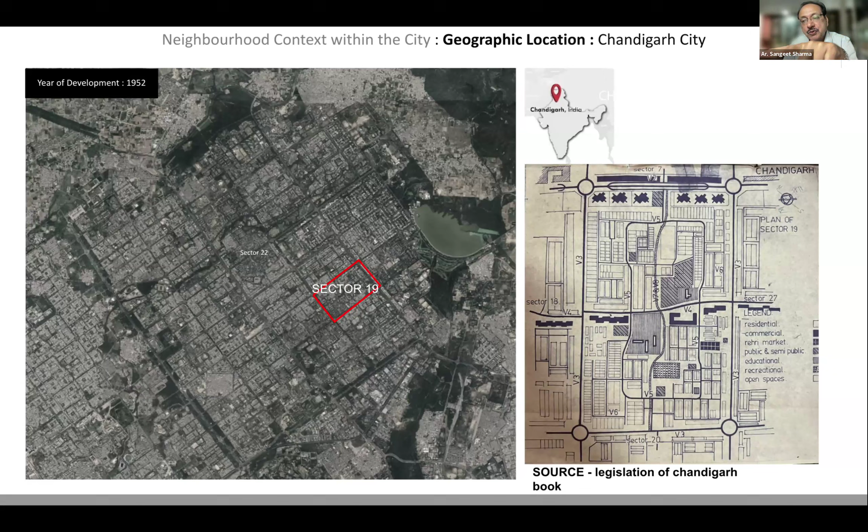The sector is there on the right hand side, and we can see how it is enclosed. So the roundabouts are on the highest roads, the widest. These are certain parameters which we have mentioned, and the area of the sector is there, and the density which is planned. So let's assume sector 19 as one city.

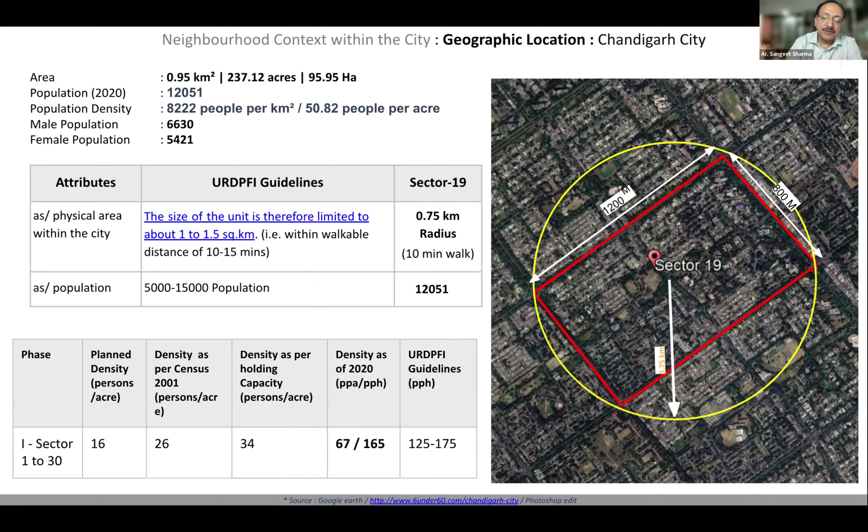So we have entered through V1, and the V2, the road which is marked in red, also divides two sectors. It is beautifully landscaped. So the division is not geographical, it is implied. Yet the sector has got its own identity. That's V2. Say in a sector we have all these kinds of education buildings, we have sports facilities, recreation buildings.

A beautiful example is that we still do not have traffic lights inside, except at the entrance when you enter the city. Of course, now with the traffic which is growing inside, we still do not have traffic lights. The roundabouts are still working, and as you see the roundabout, you lessen your speed because you know you have to turn a bit left and negotiate yourself to go straight, and it's working very fine. In fact, people have now adopted the roundabouts to make it more beautiful.

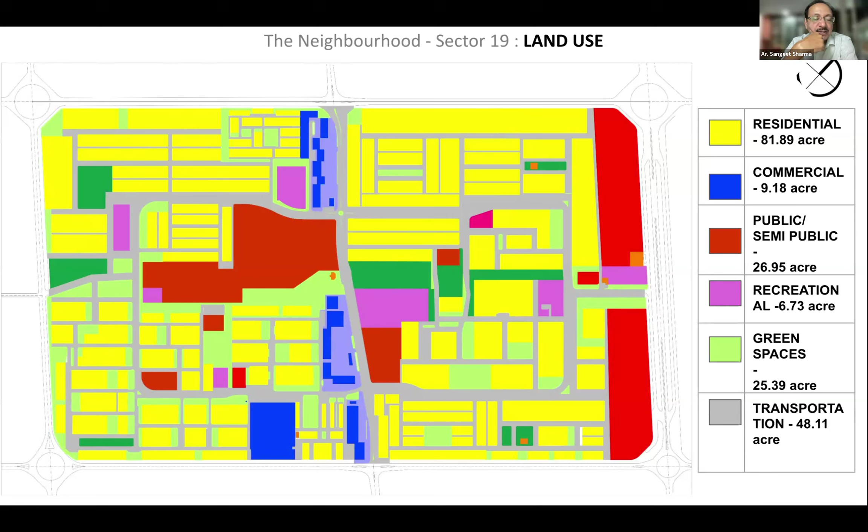If you see a sector, why are these V7s required? Say residential, commercial, public, semi-public, green areas, transportation. So all these areas, if you mark here, the center area, the roundabouts outside V2, and then inside we have V3s and the V4, which cuts the sector into two. So all the shopping areas, commercial areas are on that road. I'll skip this slide, not required. Residential and green areas are earmarked. This is just a study for you to understand one sector.

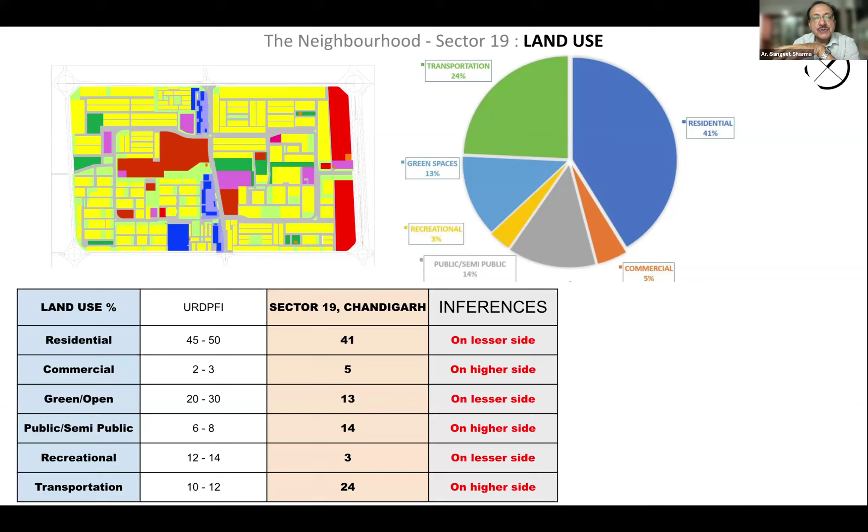I can keep talking about Chandigarh for days and days, but I thought that I will make it concise. So every sector, like for example this, has got a certain amount of dedicated zones of residential, commercial, green, public. It's in every sector. So based on this, Le Corbusier, the planner, made its roads very accessible, very beautiful. You can see this. The blue is V2. I'm sure by this time my friends have understood.

The purple is V3, 24 meters. We are entering that. Now the V2 is the divider, it's the main road which comes from outside, and then there is V3, which holds the city together. It's the boundary line. V4 is again the blue, which cuts the sector into two, which has most of its commercial there. And then V5, 12 meters wide, which is getting more into the sector, becoming narrower. And then we have V6, 5 to 7 meters, going into the houses, into the lanes.

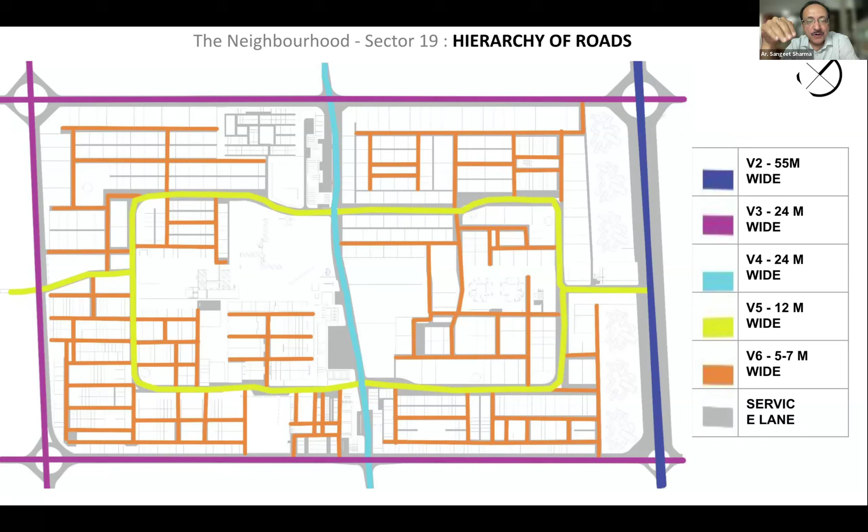And of course, we have V7, where somewhere it is a service block and service areas, and somewhere it is for the cyclist. I'm sure this one slide tells everything, and I don't need to speak much about the circulation pattern, the importance of laying the roadmap. We always use this phrase, can we have the roadmap of how we're going to proceed? This is actually the roadmap of how people are going to use the roads.

Some very important pictures, friends. I'm talking to the faculty, so it had to be something more than what I speak to the students. So V3, if we see in sector 19 and 27, is wide enough, and V5 we have the neighborhood street, the service lanes, the commercial areas.

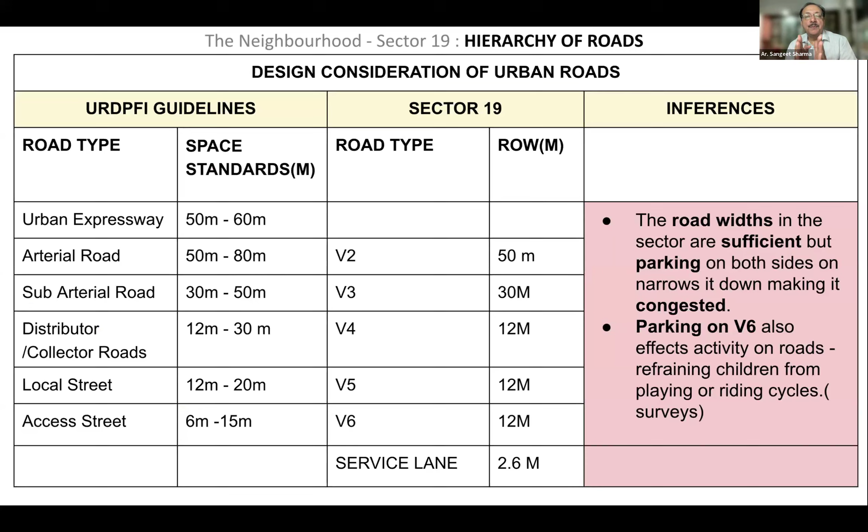I'll now come to the sections and quickly you will understand how the widths are divided, how a road is divided. Say if it is 30 meters, how do you break it up? Why do you break it up? It's like this.

My goodness. And now we realize living here how imaginative, how sensible was the traffic planning here. And the worst part is that a lot of people ask me why we could not make one more Chandigarh. And I only say that I think it needs a genius to copy a genius. We have a living laboratory. We have a living example, and we could not replicate it. It's very sad. Look at this.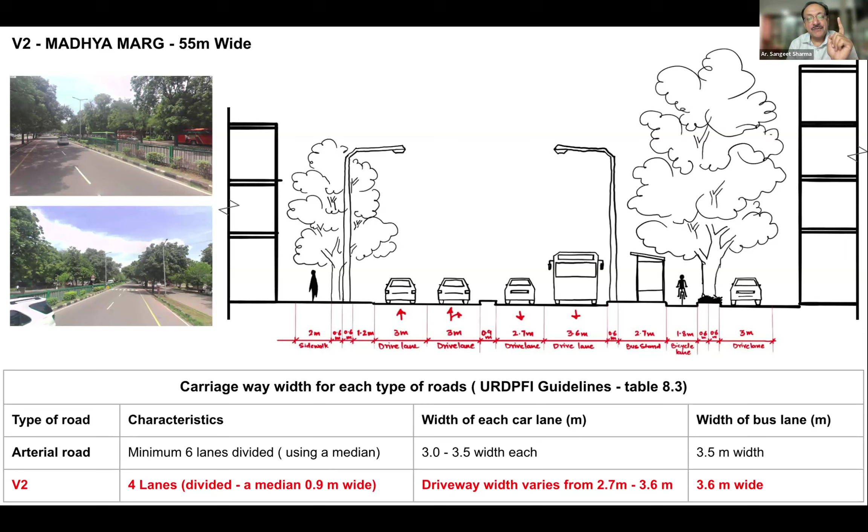This is how the V2 is divided. So we have the berms in the center, and the two cars can easily crisscross because when you're coming from outside, you're on a particular speed. So speed is the essence of road planning. When we have V3, friends, it is comparatively reduced, and we have for two cars, central berm, side berm, bicycle lane. It's all very clear. I mean, once it speaks, I don't need to actually speak.

And then the housing on the right hand side, housing is restricted. So it's not that it's a 6 story or 10 story building and then we have this. No, that also limits. And because of the housing, the horticulture, the lamppost, the section of the road is all interdependent. So when you say, we heard in the schools and colleges that you plan in totality, this little section is the planning in totality. There's nothing more to it.

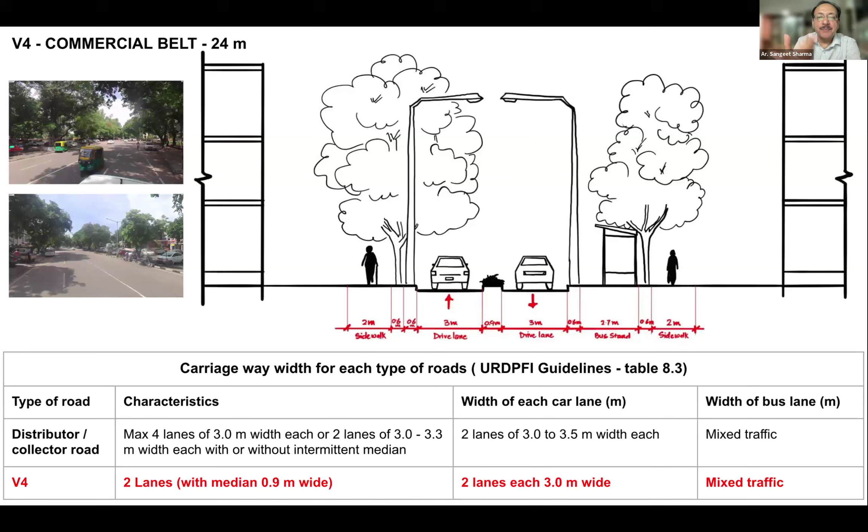So you're becoming smaller. We have V4, 24 meters. Please remember V4, the shopping areas. So there is going to be a lot of traffic here and there, and the road which is going inside the sector has reduced to this. So 3 meters, 0.9, 3 meters, 0.6 the berms, and then we have pedestrian, bus stand, and sidewalk. See how with the road there's a lot of space kept for pedestrians so that people don't actually walk on the roads. Magnificent, absolutely, and very simple to understand. Nothing much to talk about.

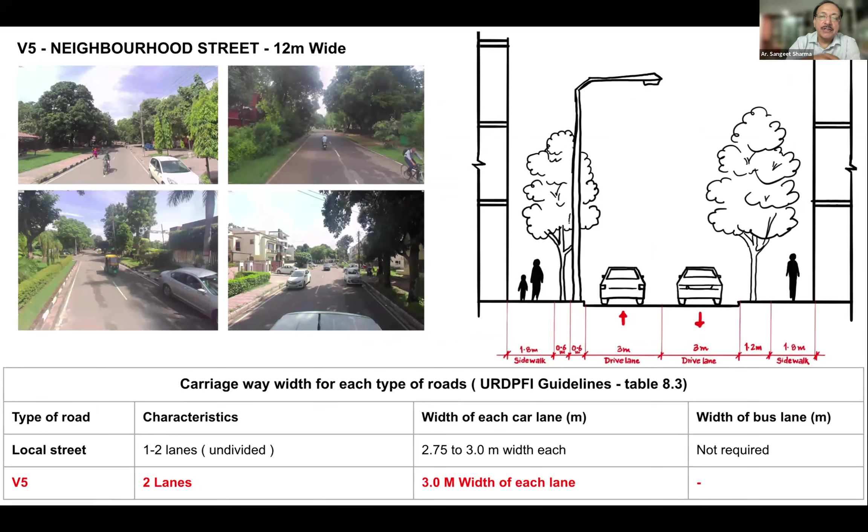Then we have V5. It's a carriageway which enters deeper into the sector. So we have two cars, positions from 5 to 3 to 2, which is going more in depth. And then we have the V6, which is just outside our houses, or lanes or by-lanes. Of course, now we have so many cars that everything is occupied. All the berms are occupied. You can see those pictures. So I'm giving you live shots, live examples. But then this is the kind of approach of the vehicular systems which happen.

If I talk about the residential, which is land use mix, and why this, it's not just to tell you why pedestrian networks were important, and bicycle lanes, the transit mode function are very, very important in these areas, supporting retails and services, and where there is commercial office, so all these are mixed land use developments with density, and so the system of transportation has been governed so far so well.

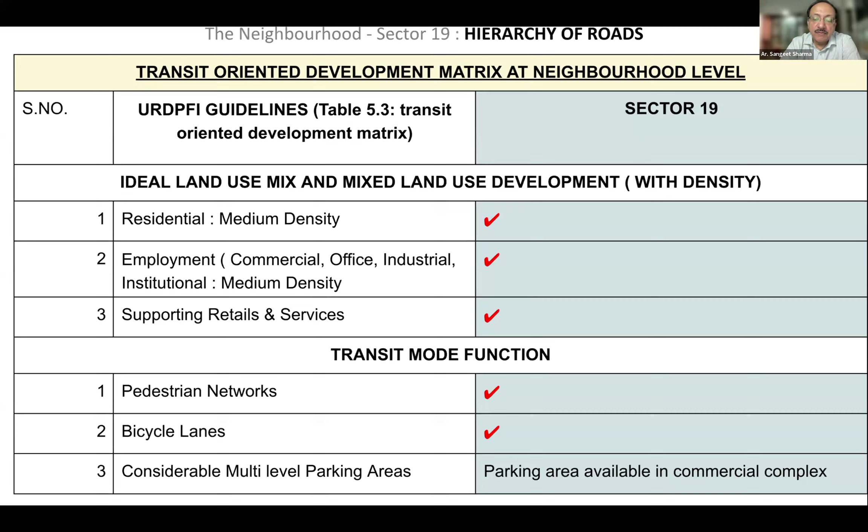If I'm going to a place, I have all the healthcare in one area, education's a little spread out, okay, services. So I'm trying to stop the chaos which traffic can create by planning my sector usability carefully. I started my lecture by saying that it's the planning which is important, followed by the circulation, not otherwise.

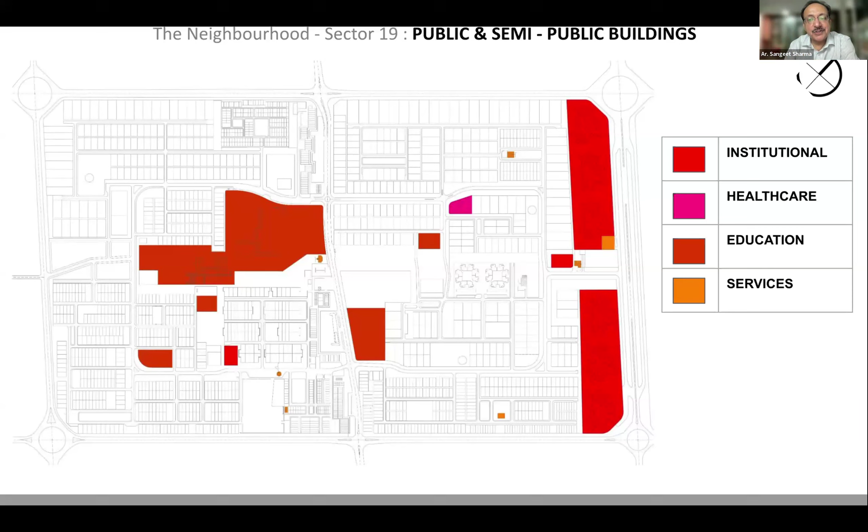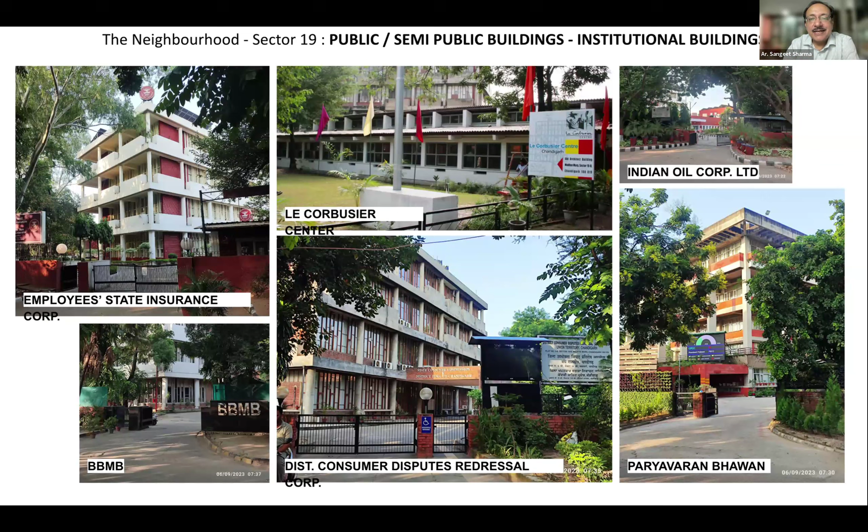Some of the buildings today, and how they are connected with the roads. You can see no hang-ups about that typical Delhi style entry into the buildings, where they're honking this and that. No, nothing of this kind. Commercial typologies are there. Even in the markets, in front of the shopping areas, there is ample parking. See, parking is becoming a problem day by day. I'm not trying to advocate that Chandigarh is going to be the same after say 10, 15 or 20 years.

But nevertheless, it's, as I said, so far so good. We have these encroachments, we have slums. That's okay. We're talking of traffic today. Housing typologies, just for the information of my friends here, this is how it is spread, and larger houses are on the sides, and as you go inside, the more dense it becomes.

And on the V4 is the shopping, so there is an even division between the people on the left and the right, and being a central zone on the V4, much can be accessible. So if you see the typologies, we'll leave this, and the gardens, how the roads either are moving along the greenery, or they're merging into the greenery. So all these green areas left in a sector, they're so beautiful.

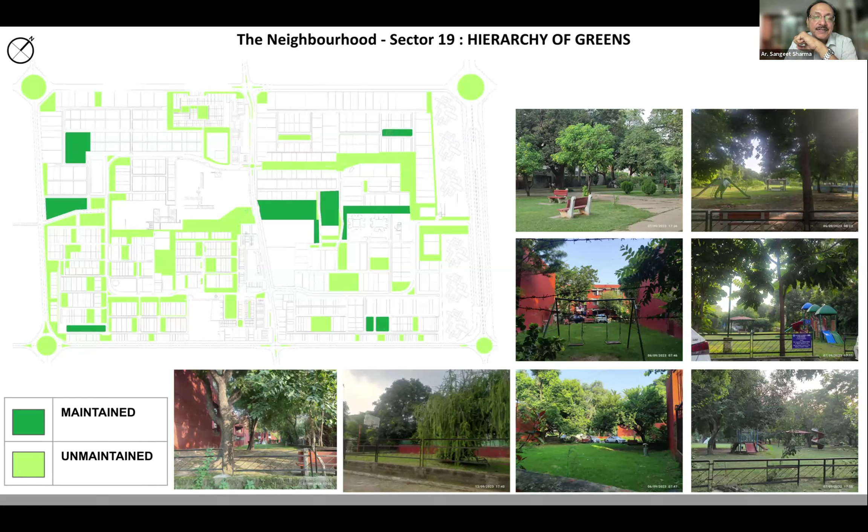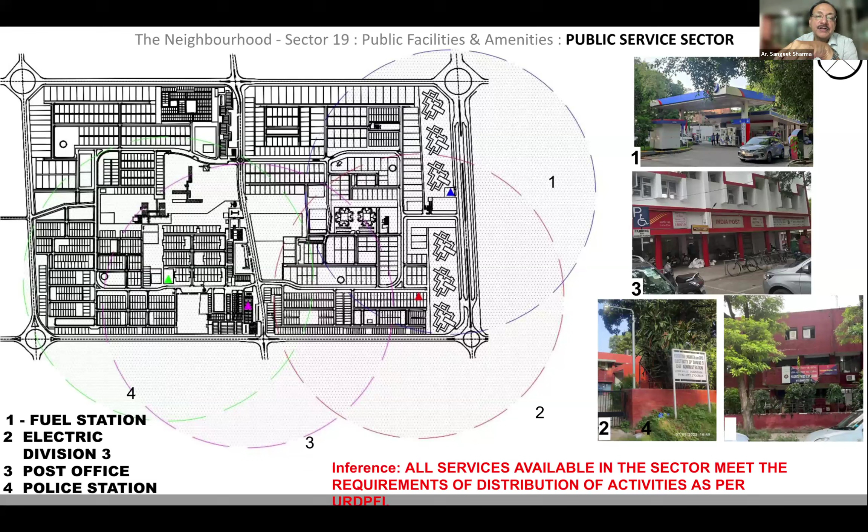Public buildings, if you see the roads there, because of the paved area, because of the large area left outside the road, thank God the two-wheelers, the cyclists have a place to park. Traffic noise was conducted, and we could make so much sense that the larger traffic makes so much noise, so we just kept it at one side. Because of more traffic it will be more noise, so keep that out, make it wider, and as you go inside it becomes narrower.

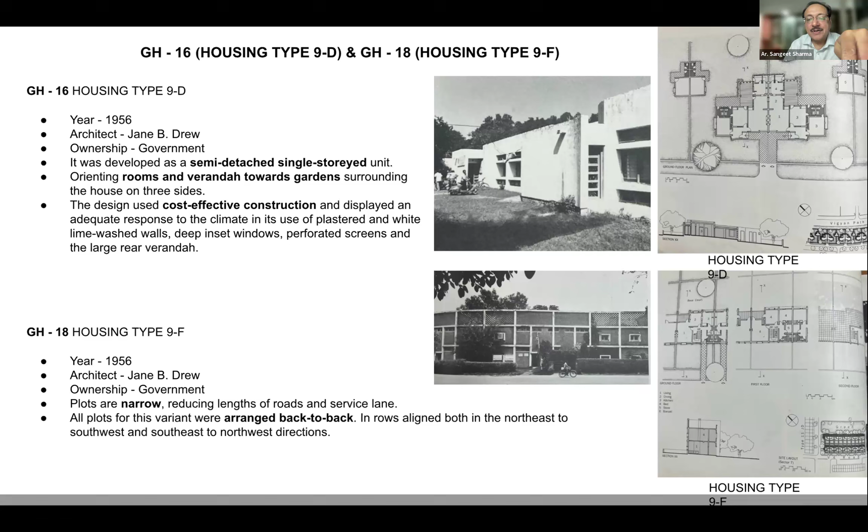Just trying to show you some houses, friends, these are by Jane Drew. And if you see the plan there, from the main road you enter into the house after a little garden, so the roads are having berms. You don't actually enter into the plot straight away. So even that has been so beautifully designed. And you can see how the cyclist is moving carefree, because the garden is fenced, and you're going in and out very easily.

Again, the roads, again the pattern of the streets. So the houses are designed based on the traffic system, which is laid first, and the housing is around it. They both are thought in tandem. Sometimes in today's world you're making houses, put the density first, and then see what is left for the roads. It's not like that in Chandigarh. I think the best part is how the holistic planning is done.

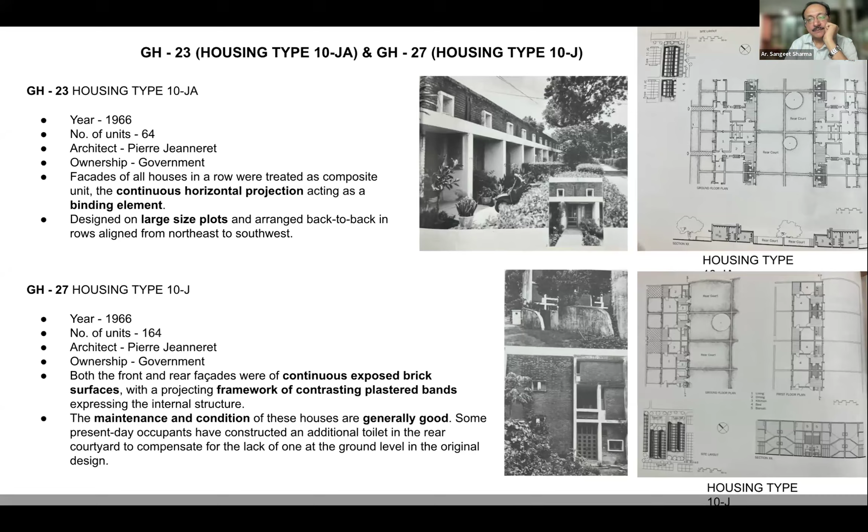Again, same kind of entry. I'm going slightly fast, I'm sure it's 8:45, and people must be a little bit hungry. So even if it's a small plot, there's a green, and then a road, and outside the porch it leads onto the road casually, slowly, not straight away hitting into the high traffic. That's why the roads are smaller. Similar justification. And all these are master architects, Pierre Jeanneret, Maxwell Fry, Jane Drew.

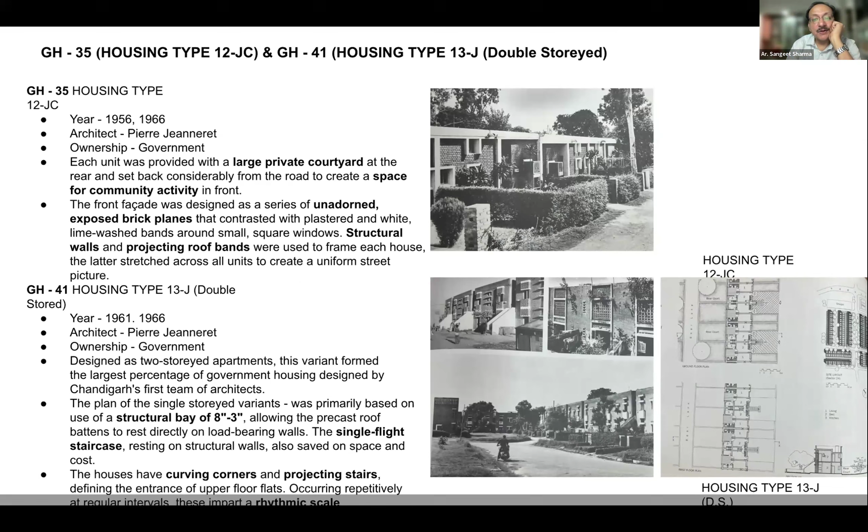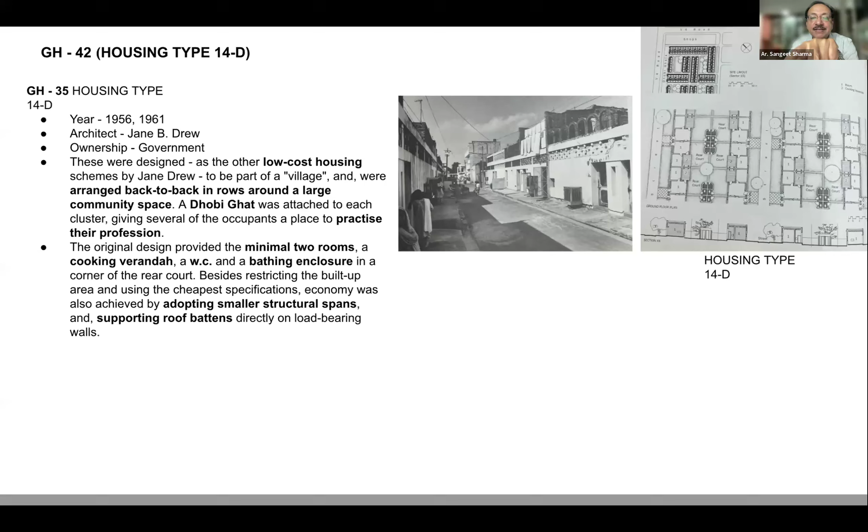Housing in itself is a great topic which I can talk about for days. And how the small houses like this also have a reasonably wide road with the pedestrian area. That's marvelous.